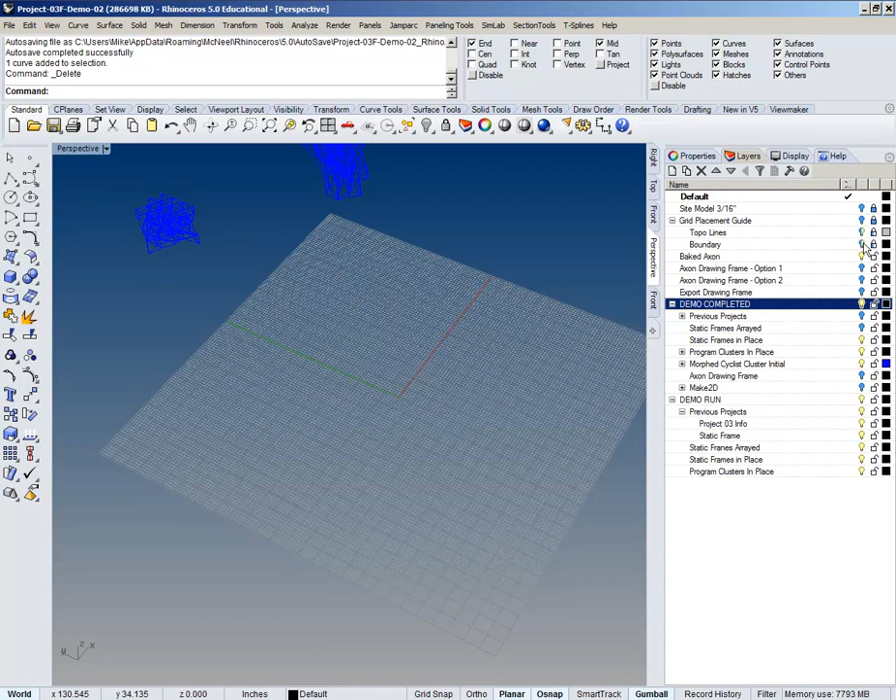Let me show you the site model, which is here. In blue are the ones placed on the site that have been modified—so in this case, you can think of it as the clusters themselves. And then in black are the static frames, and those start out as copies of the perfect version that we were talking about. You can see that the other ones are kind of stitched onto the model.

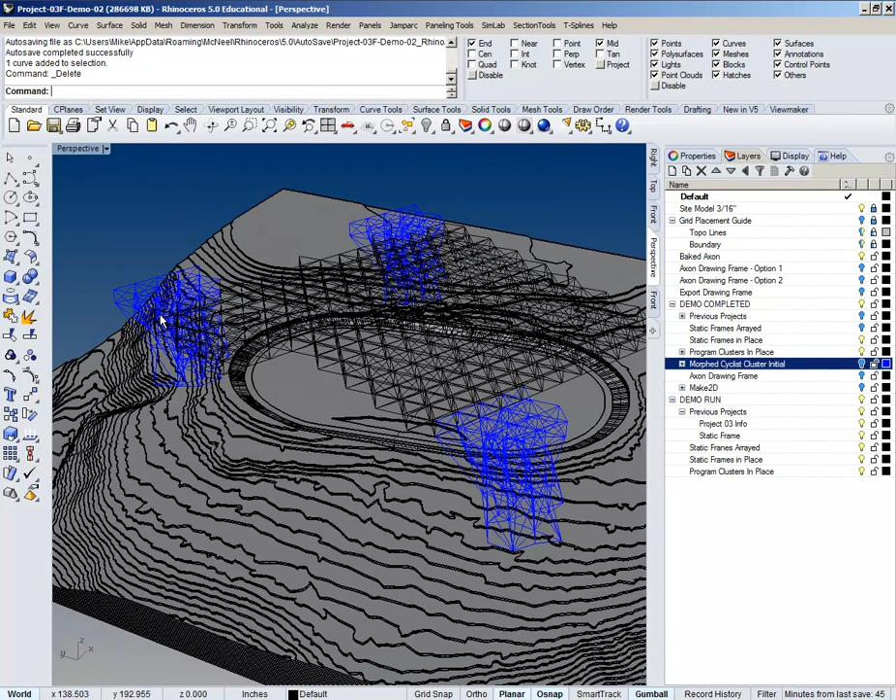So the template includes—this is a 3/16 version of the model, so it's the same exact size as your apparatus scale at 3/16. These models that are blue are analogous to what you would have gotten as output of your points—basically just putting the points in and building the model from that. And those result in drawings like that, which are the axonometric, including the site and the project on the site.

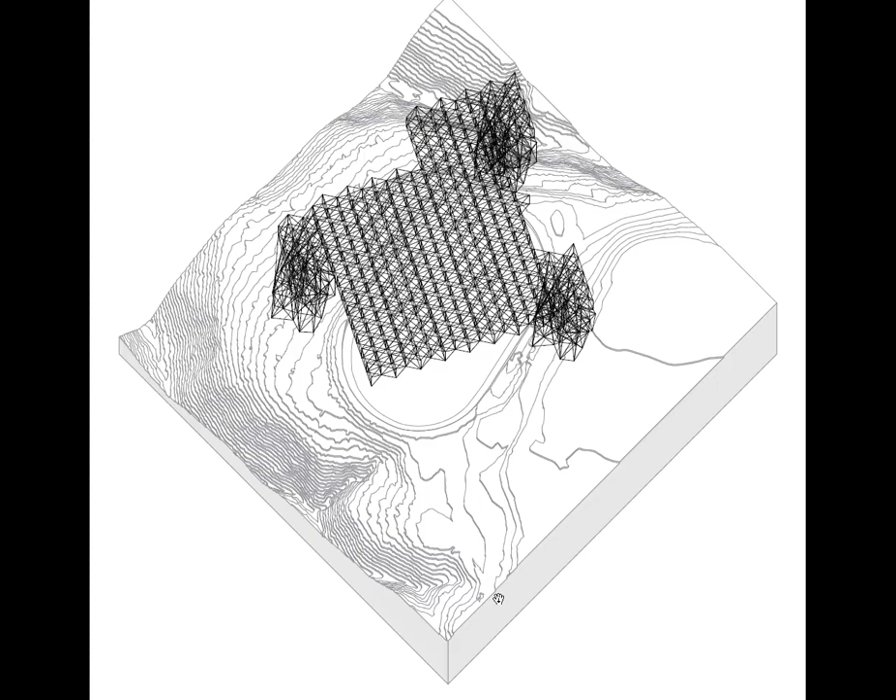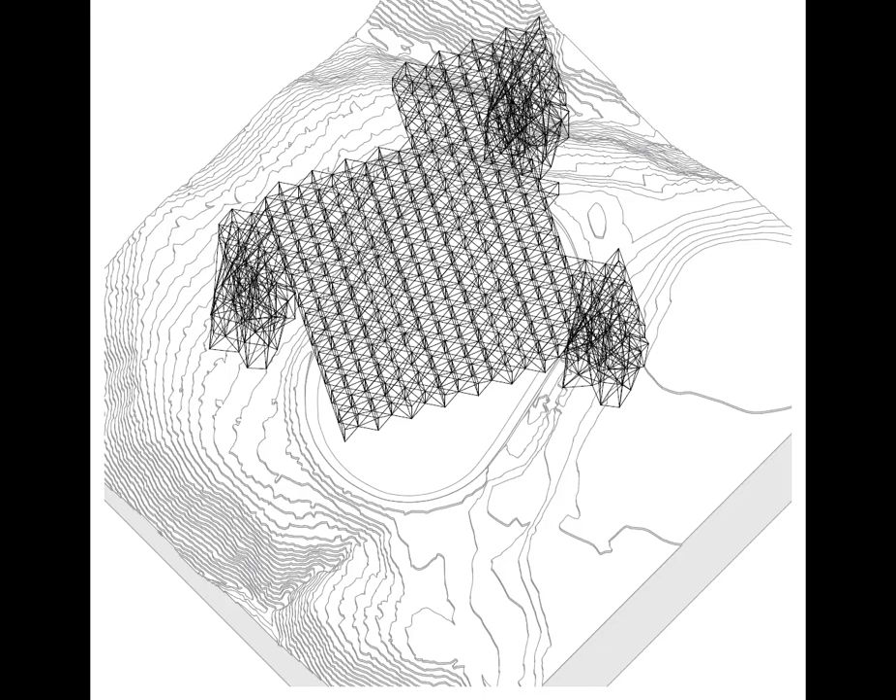You're going to have two options on that. You can have one that includes more of the site, and the other option is one that's a little bit more zoomed in. It's the same model, just cropped differently depending on how big your site is, the orientation of the site, and what graphically works better with your presentation. The template outputs to both—there are two Illustrator templates, so you just choose which one to drop the Make 2D line work into. It's the same workflow either way.

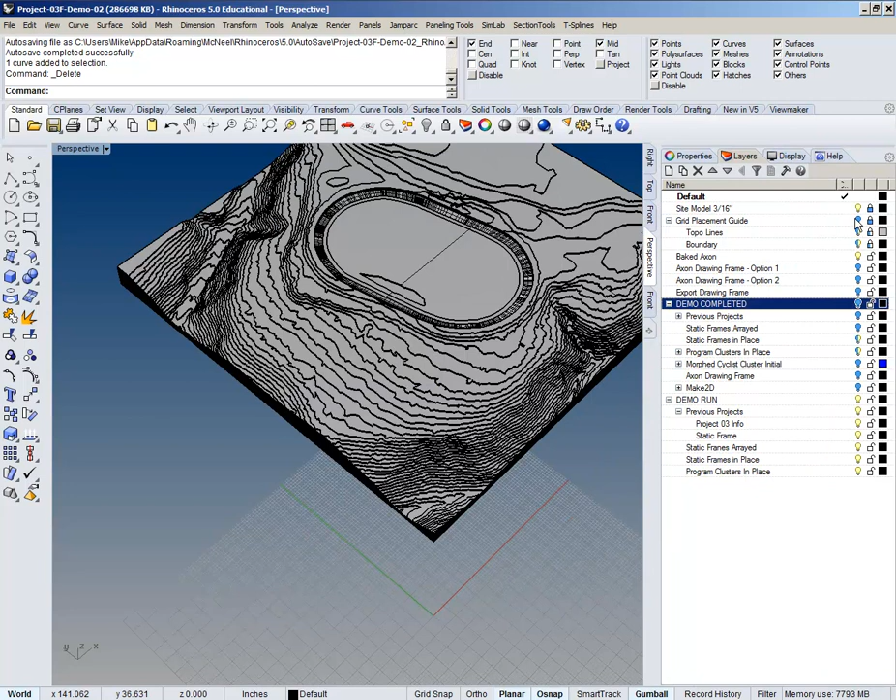So how do we get there? Well, the first step you want to do is populate the static grid as an entire series. Let me put away the thing that's been done and talk about that. We don't need to worry about the model yet, but in terms of—I've got one of these static frames modeled out, so if you've got it, I'm going to import mine, you could also just model it into this template. Let's see.

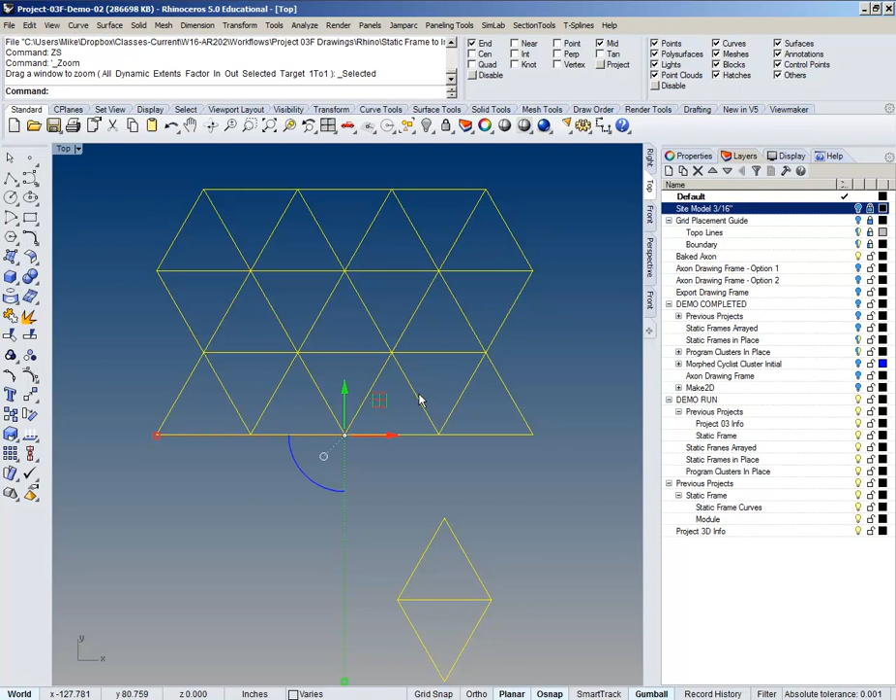So I've got mine right here. I've grabbed a module off of it just to show you a possible way to assemble one of these. This is just this module, two of them, but it's copied out of it, rotated, and glued together side by side.

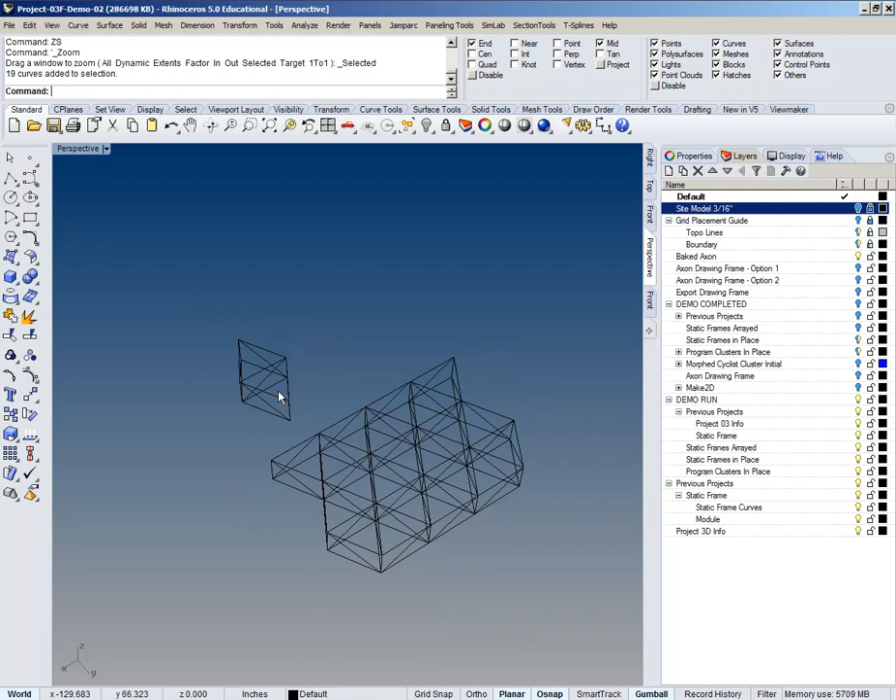It all depends on the kind of condition that you have. For this one, when I start thinking about how, what I did is I just grouped the entire thing together. So I think about how do I want to repeat this. This one, side to side, I know how it can repeat. So I can say it repeats by going side to side.

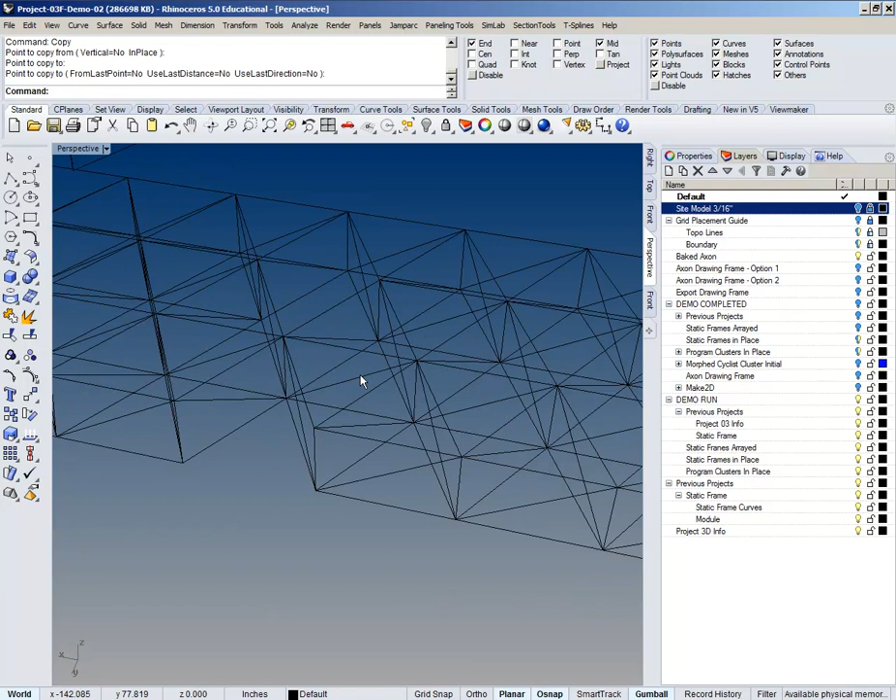It's a better point right here, like that. And I'm kind of looking at the cross members staying in the same direction. And from that, I have these kite-shaped gaps. And then when I look and connect on the other ends...

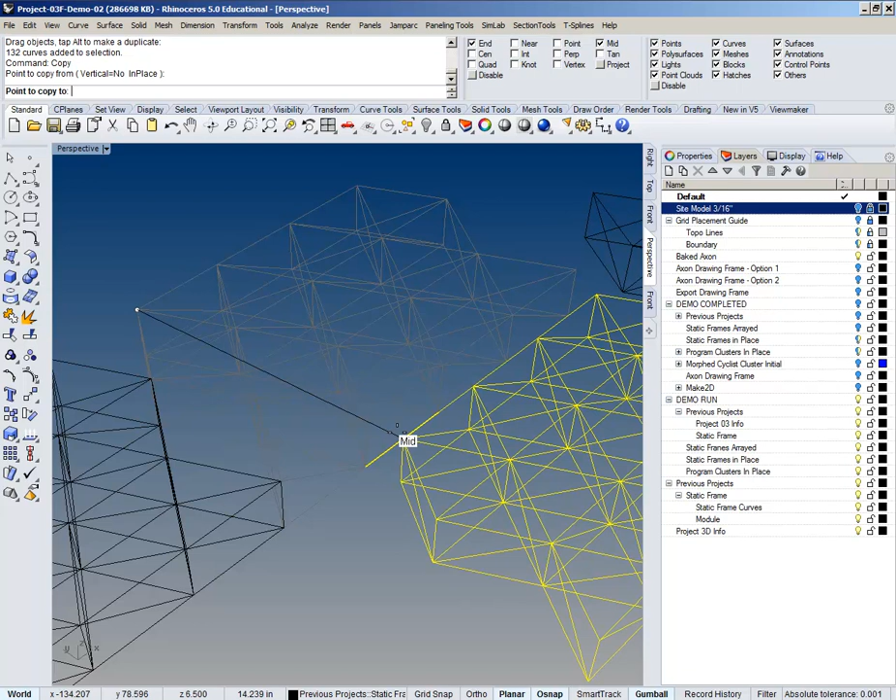When I start to copy them over like this, that might be another method I could copy it as well. That's going to leave certain gaps.

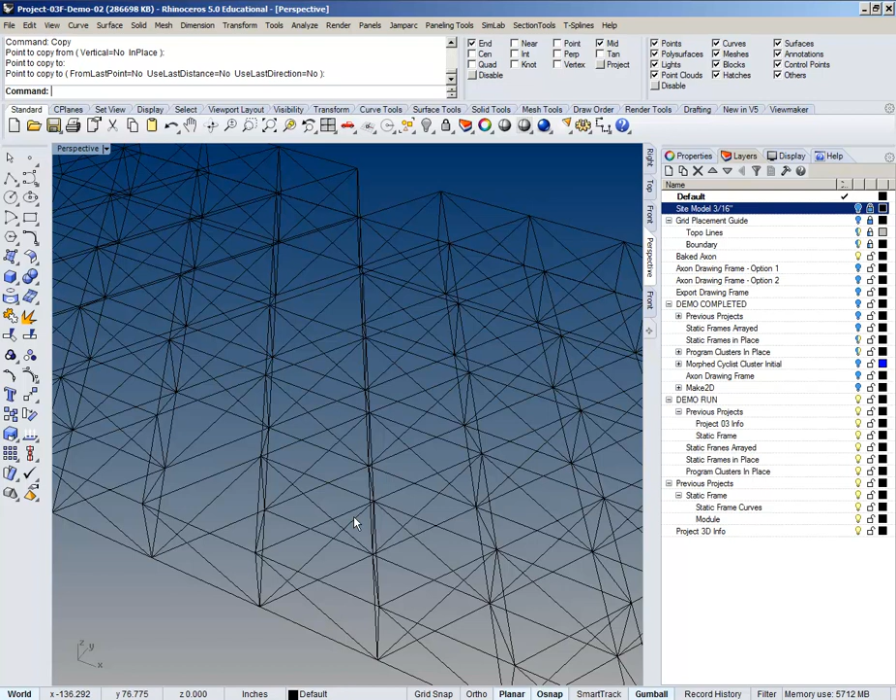For this particular space frame, doing these kinds of copies doesn't cause any problems with my cross-diagonal members. They're not crossing each other up. People with these kinds of systems want to keep them going in the same direction, and that leaves these diamond-shaped gaps that happen in there.

So that's one way to look at it. If you're worried about keeping it symmetrical in terms of what this shape is and you want to mirror that shape, you can do that too.

If you do that, you'll notice... let me go back one step to here. So if I brought it around the other way and lined it up so they're sandwiching each other, like this, you can see that that's going to cross up their cross-diagonal members and create these X's here.

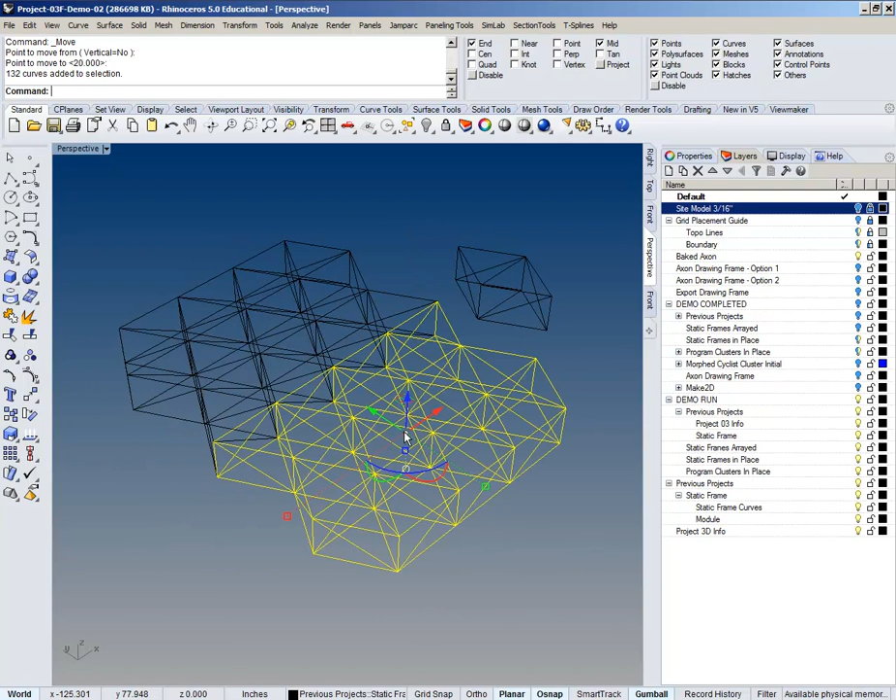So if you're worried about something like that, you can take this object and mirror it as well. Just basically mirroring it on a vertical axis will create a mirror image of it, and the cross diagonals will all be going another way this time.

A quick way to do it is in elevation, just go into a front view and do the mirror on a vertical axis, and then you don't want to use the copy option. So say copy no.

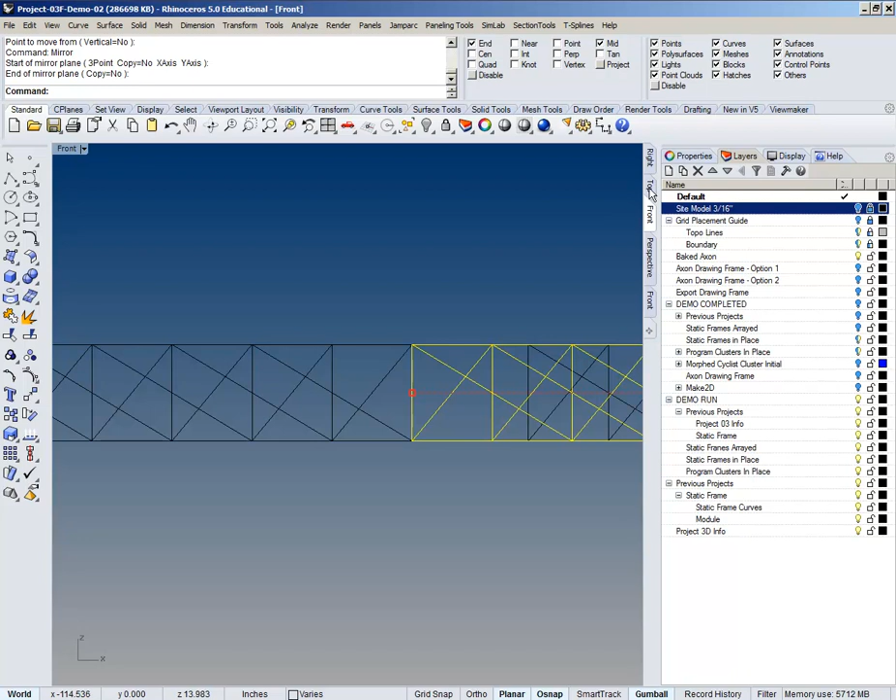Now the diagonals are going the same way, and then this can repeat in that direction as long as I want, and I'm guaranteed I'm always going to have the diagonals in the same kind of way. And I could use this piece to plug it in there. So that's my logic that I want to do.

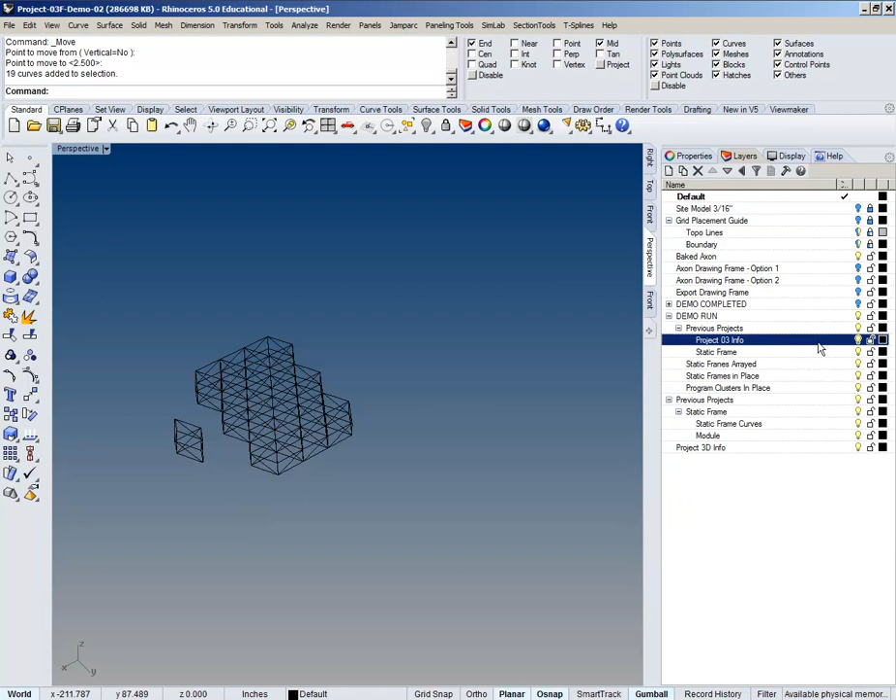Then the question is, well, how do I know what copies I need and all that other good stuff? So that's when you would input previous project info. That's when I would bring in stuff from project 3.

I've set it aside, but you guys already have this info, and that's basically what your flows were when it comes to the grid information itself and the flows and all that kind of good stuff.

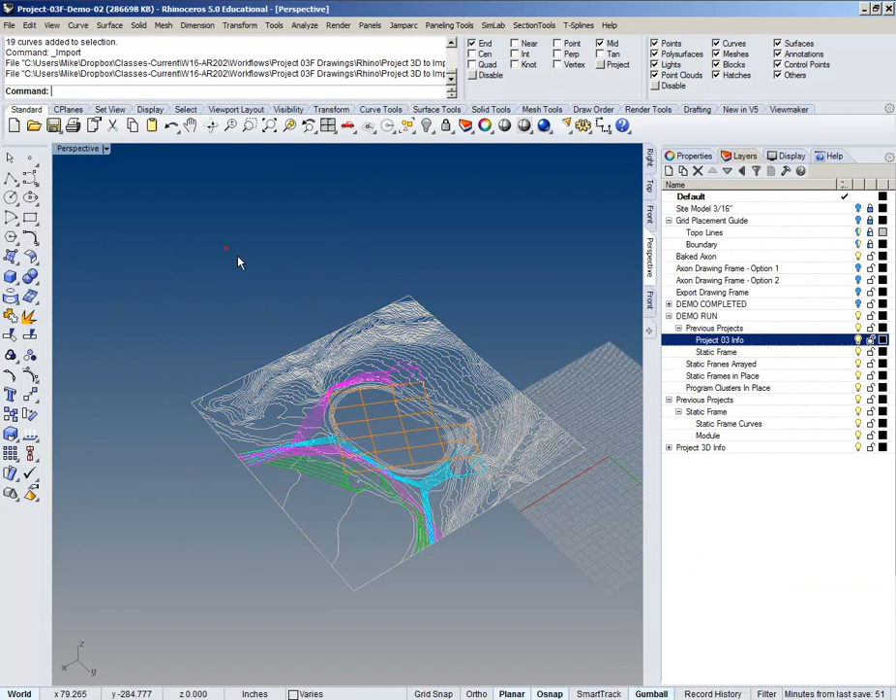So this has my frames here and all that. I put this kind of stuff—it's called... I have it under Project 3 info. So I'm just going to place it in the previous projects here, and that's a redundant name.

This has the site plan. It has the flows. It has the selected tiles. It used to be black—I changed the static tiles to have an orange color just to jump out from the topo a little bit. But everything else is the same.

This also has the footprints, right? The three footprints—for this case, I just dropped them in there. Everything's flat, it's a 2D drawing.

So what I want to do is, if you take the long view of it, I've got this layer called Grid Placement Guide in here, and that Grid Placement Guide is directly underneath the 3D site model. So you can already place everything, align it to your grid, and then all you have to do is move it vertically to get up on this site.

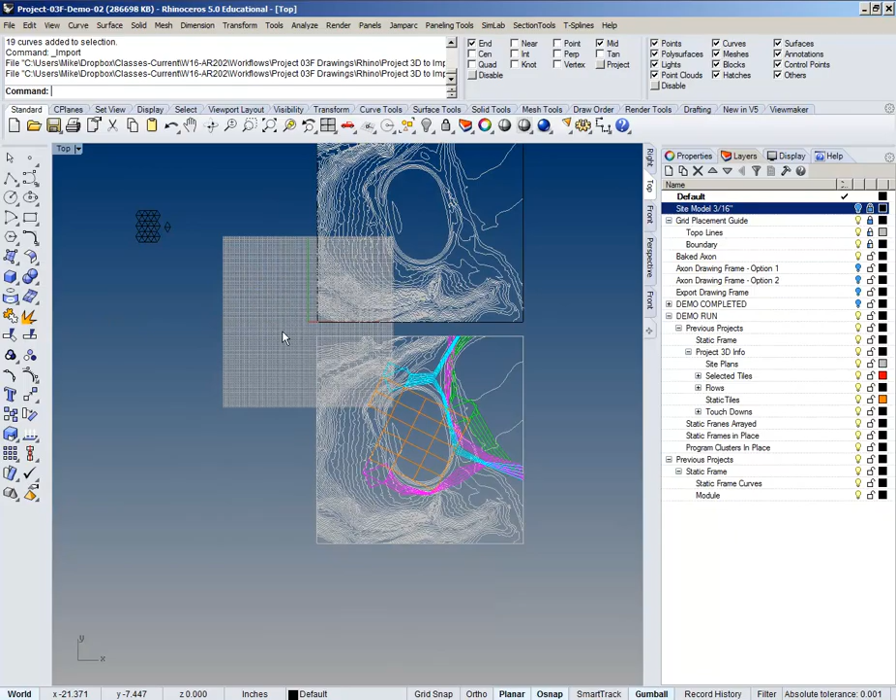So you don't have to do a complex movement or anything like that. What happens is I had this grid placement guide locked, and I take this project info and just move it over there to match up with it.

I'll pick a better spot to move it from too. Usually when I'm doing this kind of stuff, as a safety measure, I put on the project setting just to keep everything 2D, so I don't snap to something 3-dimensional by mistake. Whenever there's a lot of moving parts, I like to do that.

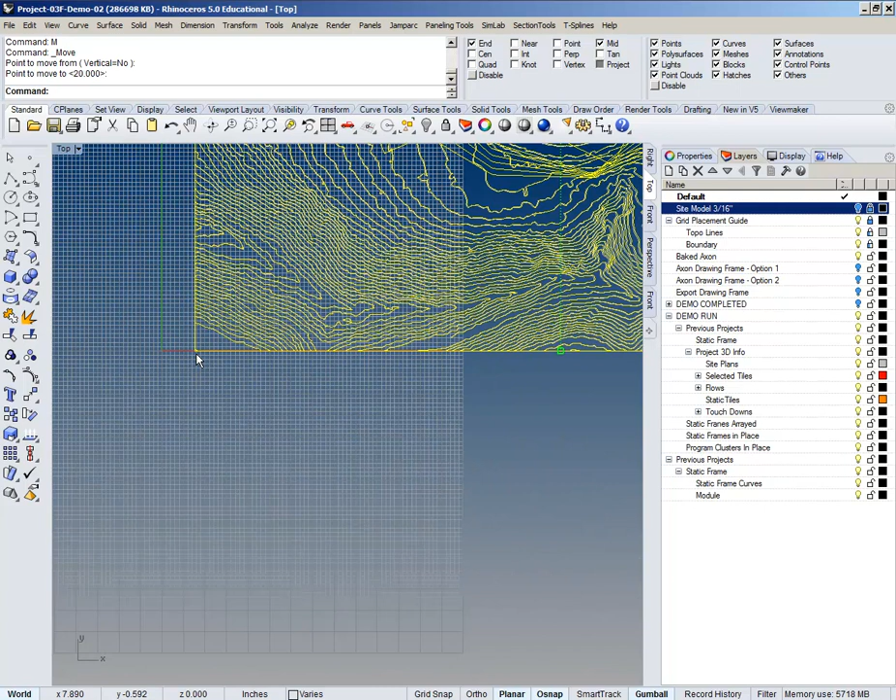Now that's in the right spot, I can take off that grid placement guide. I've got the data from before for project 2. I'm going to lock some of this stuff like the site plans and turn off the flows for a second, and take off the site plan so I can just see this situation here. I can take down the touchdown to keep it simpler.

So I know I've got that, right? I've got, in this case, 1, 2, 3, 4, 5, 6, 7 by 4 grid. So that's the extent of my entire thing. I'm going to group this one here. And since this one is now working as a new module, I don't want to just repeat this one, I want to repeat them both, so that the tiling works out nice. It's going to be different from everybody's, but I just wanted you to see the logic.

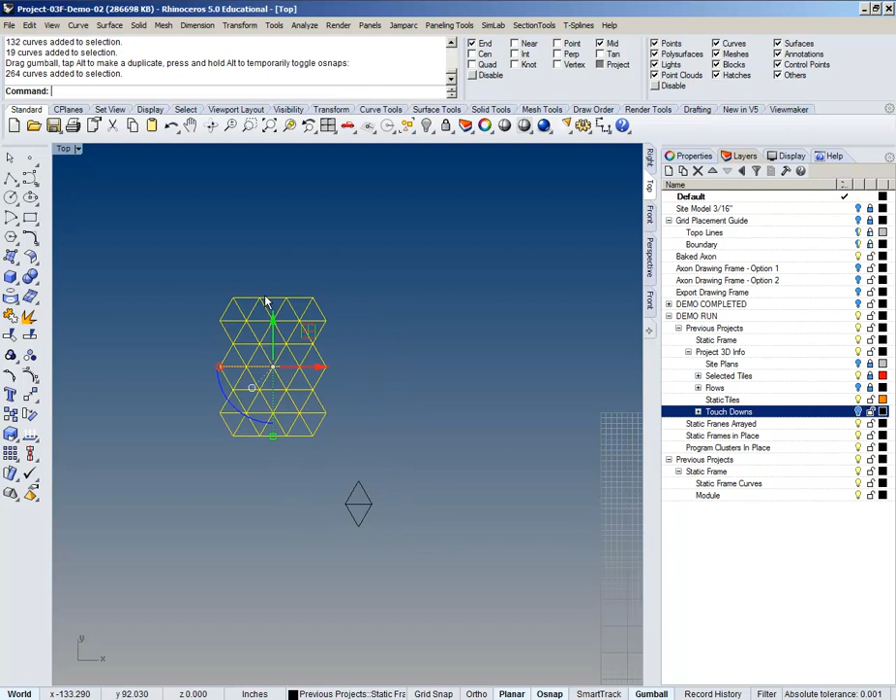I can move this key out of the way. I'm going to group these together, so I can just do Control G. I can have groups inside of groups inside of groups.

I'm going to make an array of these, and I think I said I need 4 in that direction, and I need 4 in that direction because these are too high now. So that'll give me 8, more than what I need. So I'm going to do 4... no, I'm not worried about the Z direction.

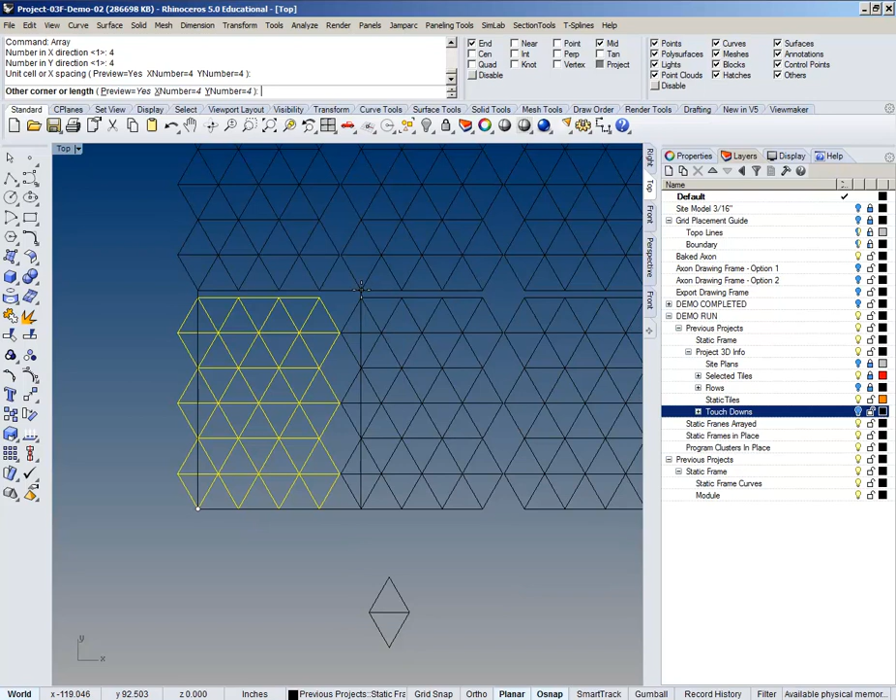In terms of my cell spacing, this will give me a preview, but if I do the cell spacing with X and Y, I can start to go like this. Now what I want is out here, but I can't snap to anything because nothing's out there. So if I turn on my smart track down here, I can pull off of this endpoint and this endpoint and find the intersection that occurs right there. That's the cell spacing I want for my grid system. So I would say okay on that.

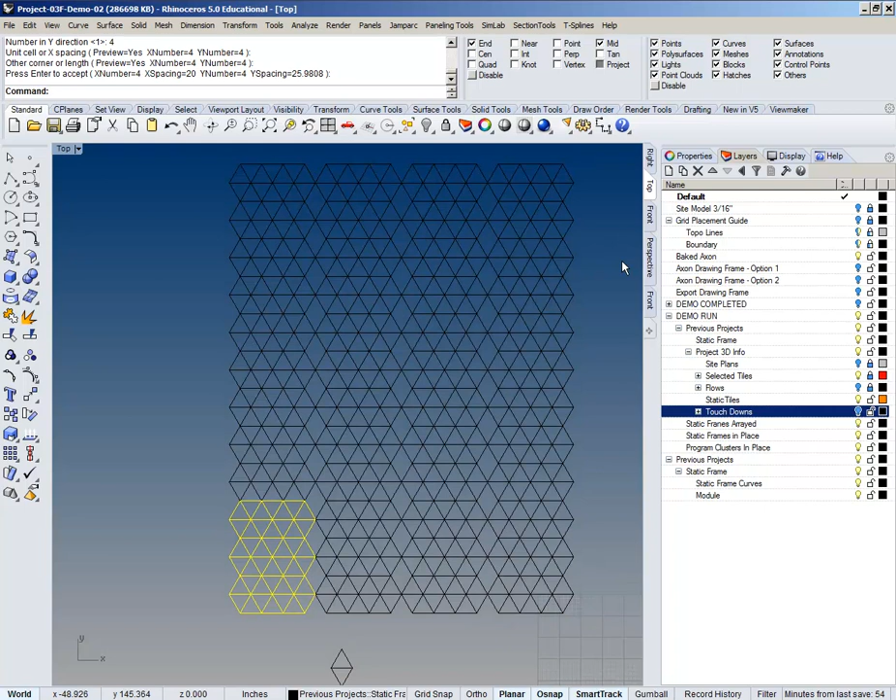As you can see, it's kind of hard with the curves, but I've got this condition here where I've got holes in it. Maybe it's a little easier to see in perspective, that I've got these kind of gaps, these holes falling in there. I can fill those gaps in pretty easily with the array command.

You always want to put... so I've got this as a grouped object, I think it's grouped, yeah it's grouped. I'm using project here because I want to keep everything flat and planar. I'm never worried if I have the project on, if I move something in the Z-axis or anything like that, everything is going down to the C-plane and not changing heights.

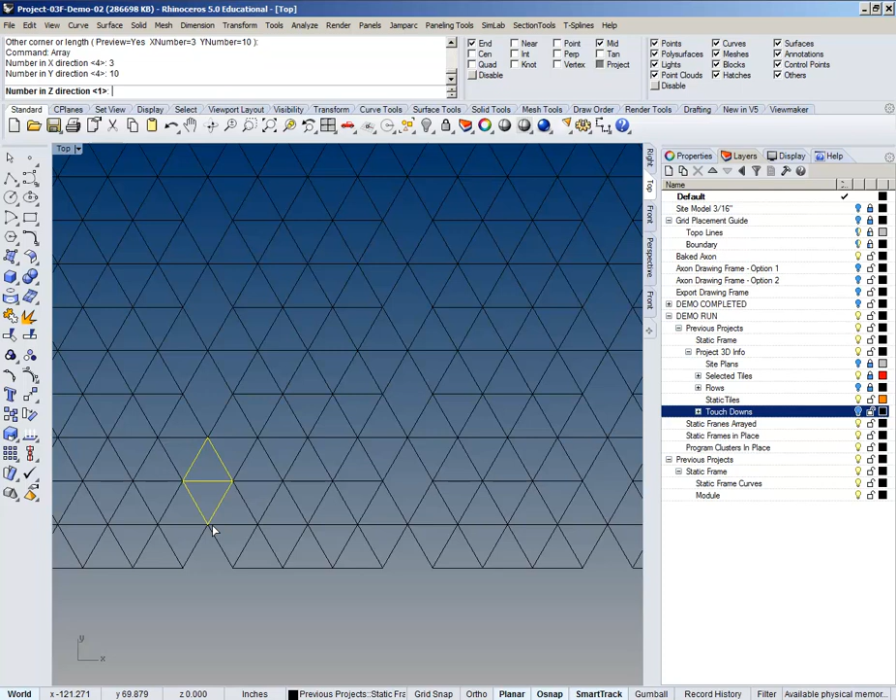I've got this end condition here. I'm going to leave it, and I can always go in here and modify these end conditions if I want to using this module. So this one's like 1, 2, 3, 4, 5, 6, 7, 8, 9, 10. I'm going to do an array of 3 by 10 by 1, and my spacing on this one, actually I want to start by a different point, start here and go up like that. That's gonna... nope, I need more Y's. There we go, so that's done in terms of being filled out.

Now I can either count these and start taking them out. Mine's fairly simple and I can decide what I want to do, or I can bring this whole thing over and pop them out too. It really doesn't matter.

For this to get a good corner, I'm just going to do a bounding box on one that actually exists. So maybe it's a good idea to take some of these out right now, just because it'll give me something better to snap to.

So if I explode this group... or I can just do the ungroup, I don't want to explode it. Exploding will explode all the things in it, but it won't ungroup it, everything will stay grouped. So if I ungroup these, I can get rid of these guys right here.

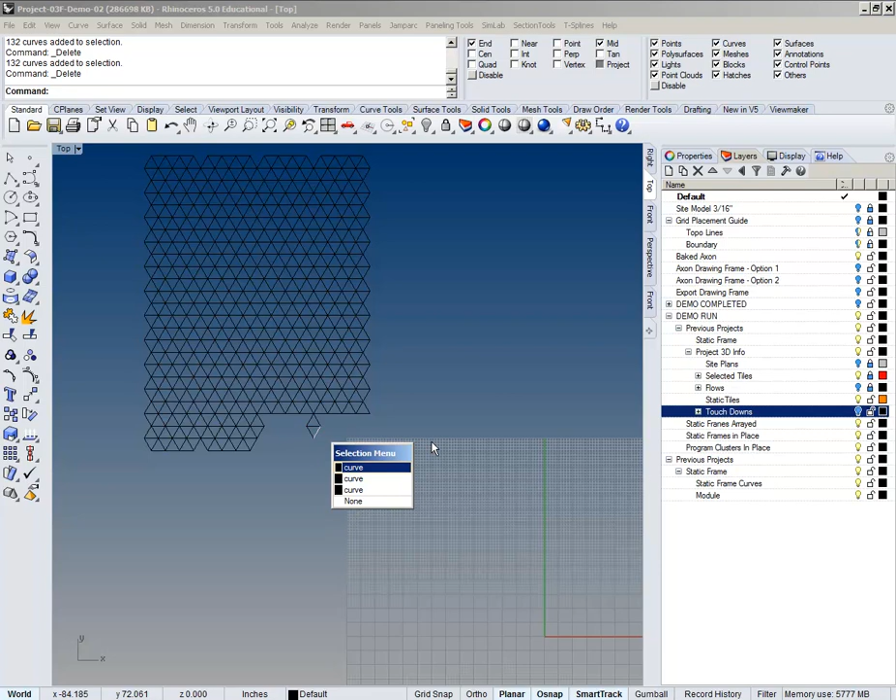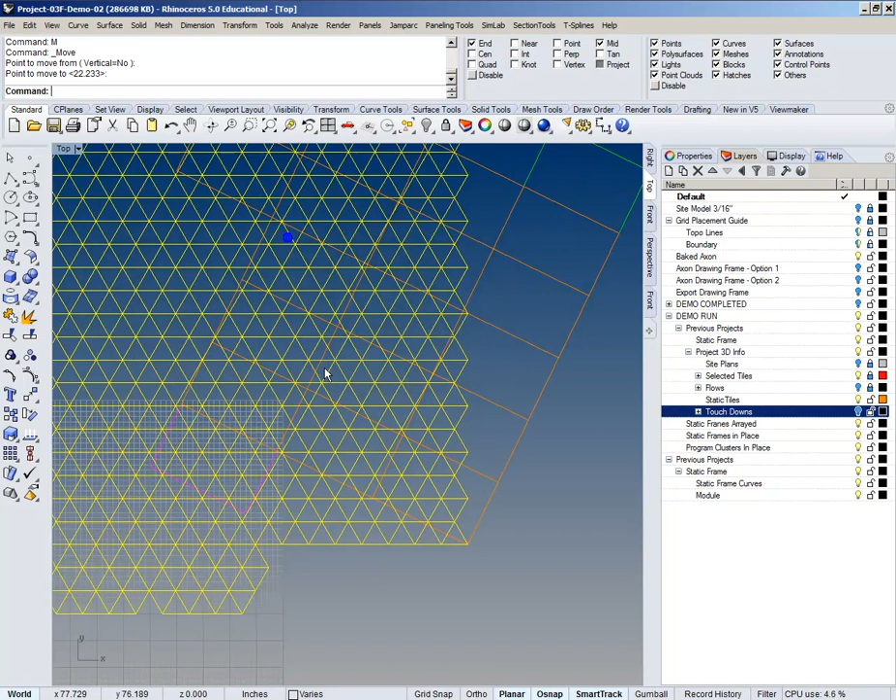And that's a good corner to start lining things up to. So I can take this and move it over here. This just happens to be where my bounding box hits one of these guys, I kind of know that already. And I'm going to rotate them from that corner as well. So again, I'm moving over on this one, so I'm going to come up here.

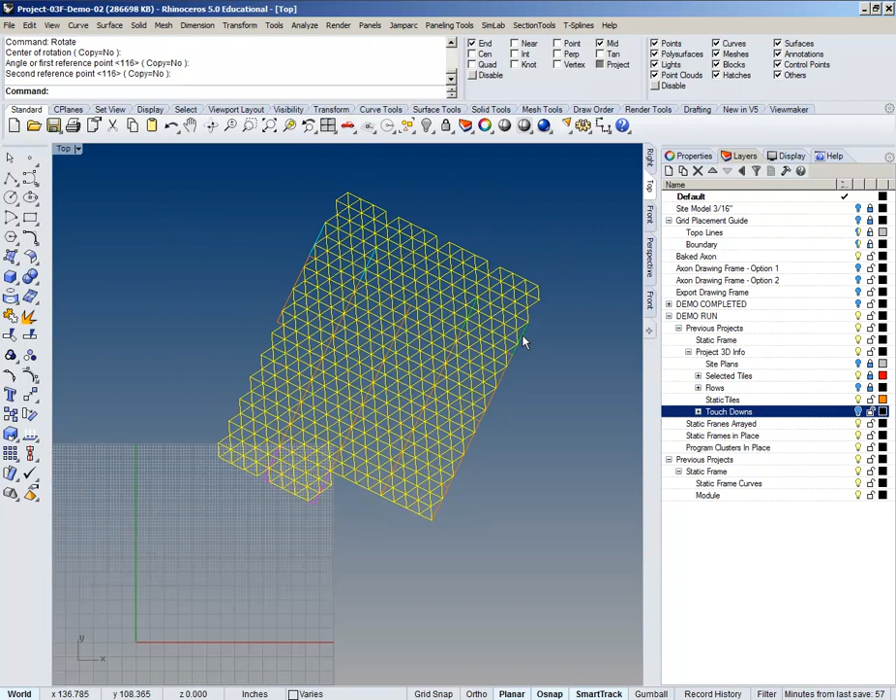And SmartTrack. Yeah. So in this case, I've got some extra ones that I can lose.

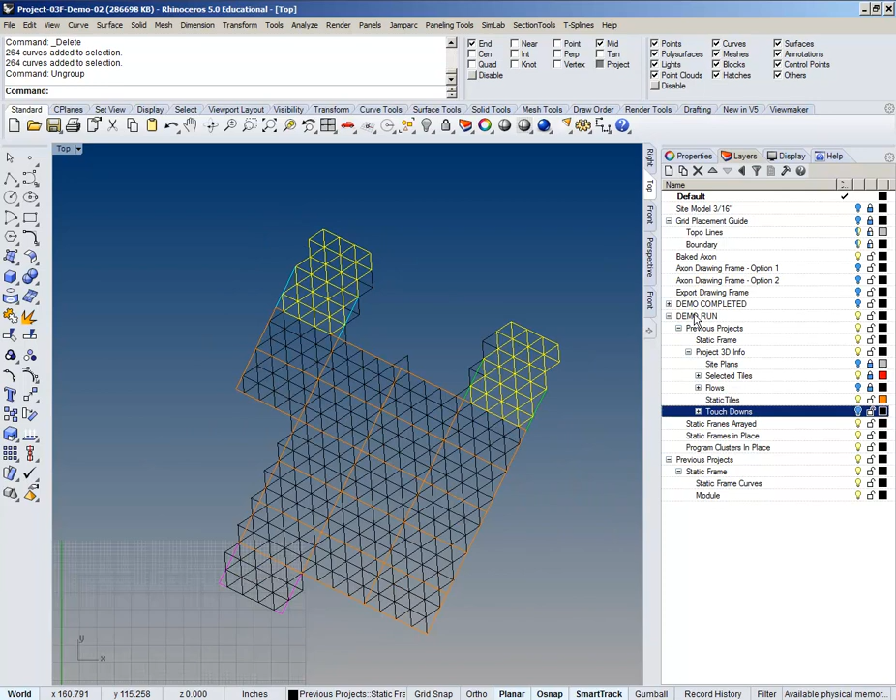And you decide if you want that one or not. I kind of like that there. And again, I can ungroup these two to break it down into smaller modules.

Same thing goes for these, since I'm going to replace these with the deformation versions. Okay, so I'll get rid of those two, and you can decide what you want to do. Sometimes it's nicer to keep it rather than get rid of it, because it's easier to delete it than it is to go and find it and add it back.

But let's say this is your setup and you're kind of happy with it, and you can see that in perspective, they're kind of all planar and they're attached. In the way that I did them, my diagonals, I'm not getting anything kind of funky going on it. So that's looking good.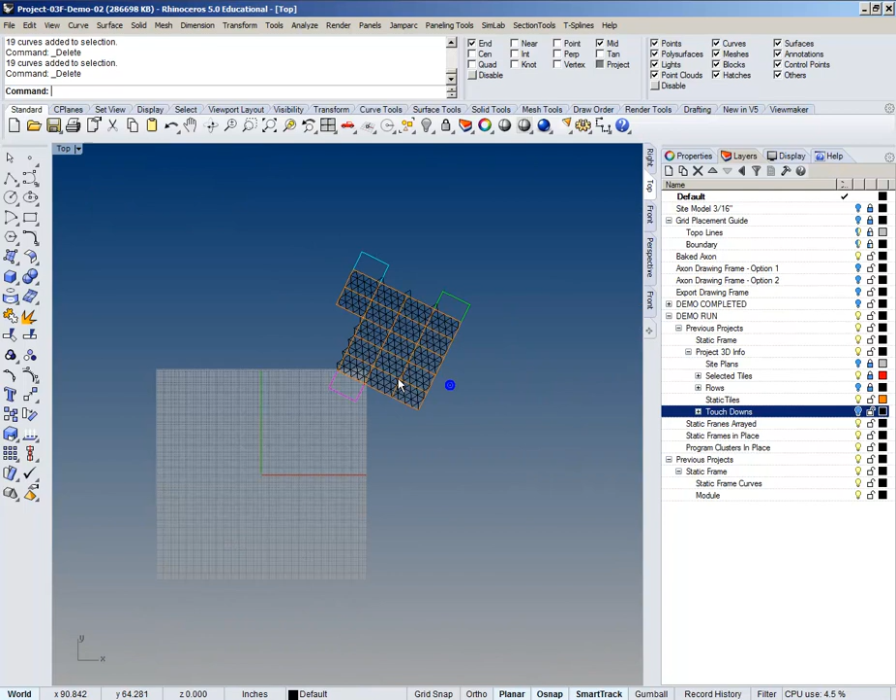You can start to see why it's important to use the perfect one, that way everything lines up kind of clean. So we've arrayed them. So the next thing to do is to add the cyclist cluster to the grid along with the other clusters.

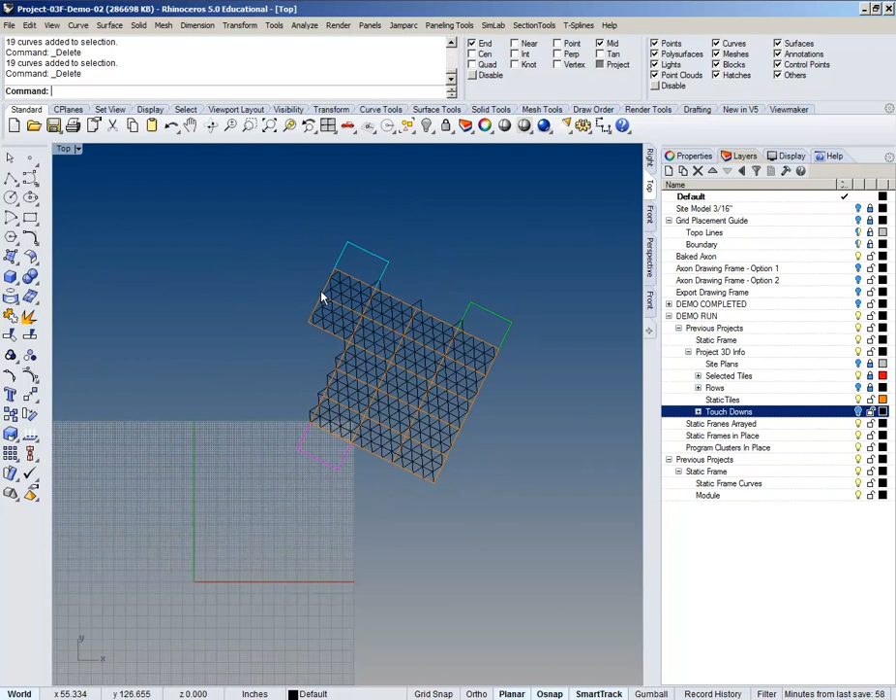So I've got it here. What I'll do is I'll just bring it in, so I'll take a look at it. I think I've got it in a separate file here, and this is just the model itself hanging out. I've got a couple of other ones that are in there too.

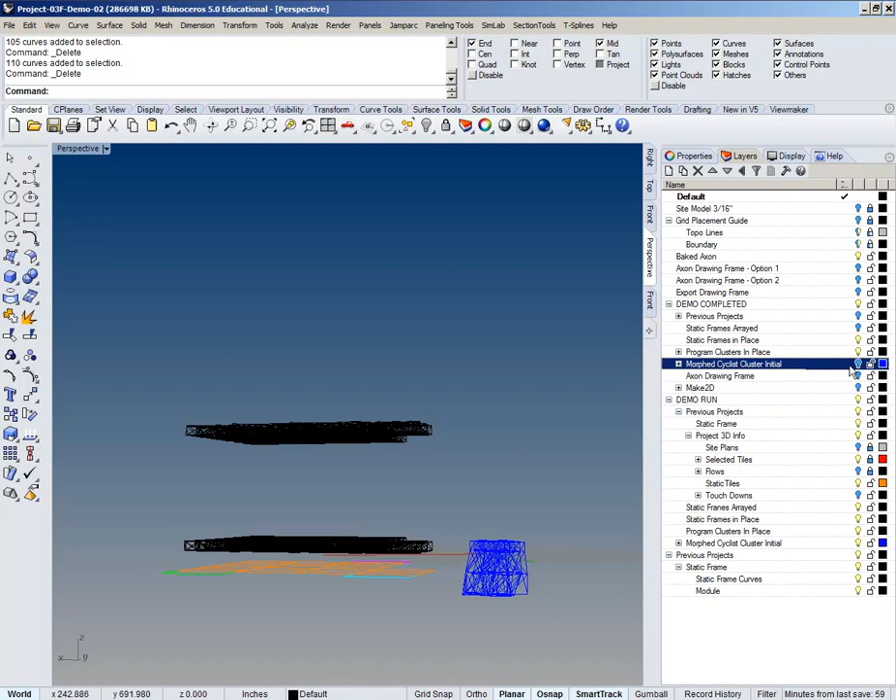Those are the ones that are already in place up there. So I think I grabbed too many of them. Let me take that layer off. There we go. Cool.

So if you've got it like this, it might not be that height, it could be another height. What this is for me is I've got them grouped as 3 separate ones, but I can treat it all as one group. So I'm going to Control G that to group it.

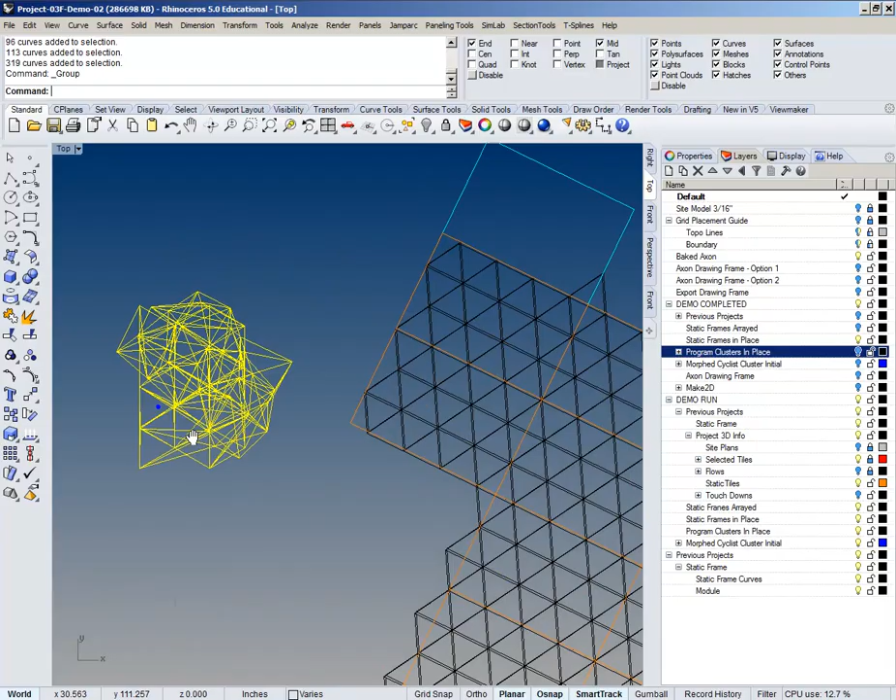And I'm going to place it in my actual setup here. So plan can kind of trick you on this one. You just want to find a good point to connect to. So I'm just going to start with one of these corners and look at what's going on with my grids.

I know that this is kind of a good start. I'm not so worried about getting it perfect the first time. I'm more worried about just connecting nodes with nodes, and then I can start to nudge them over. So if I get in the neighborhood here, and I'm kind of familiar with the way that mine tiles, I'm going to give this one a shot.

By connecting this corner to that corner, and I think that's right. So I'm going to rotate it. I can rotate this in 3D because the rotate is always about what the world C-plane is. Only if I can spell it though.

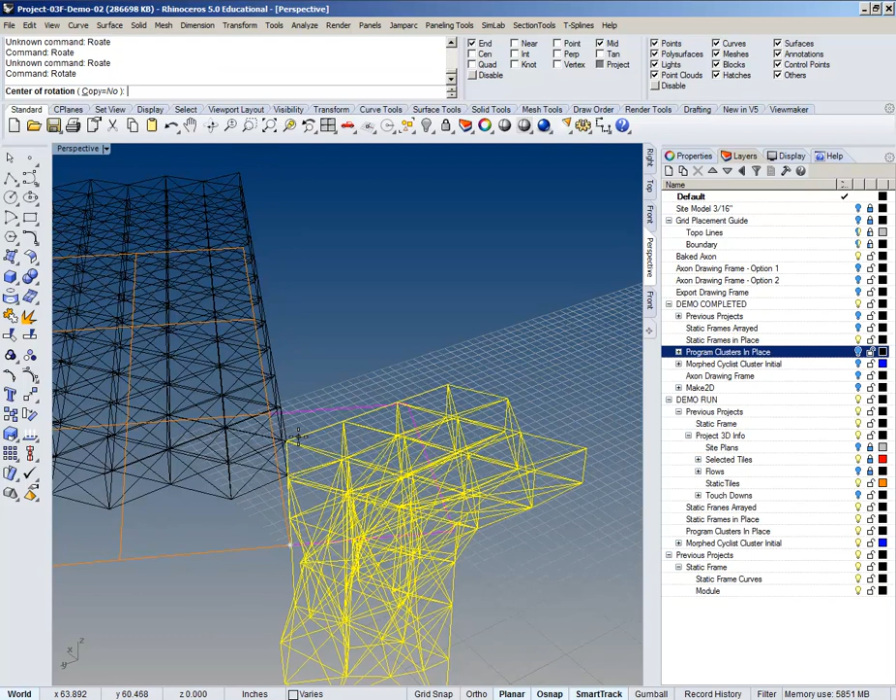So my center is going to be where they're already touching, and see how it's projecting down there. It just makes it easier. Go there, and I'm going to bring it over to there. And this one gets a little harder to read in plan because things are already kind of distorting away from you.

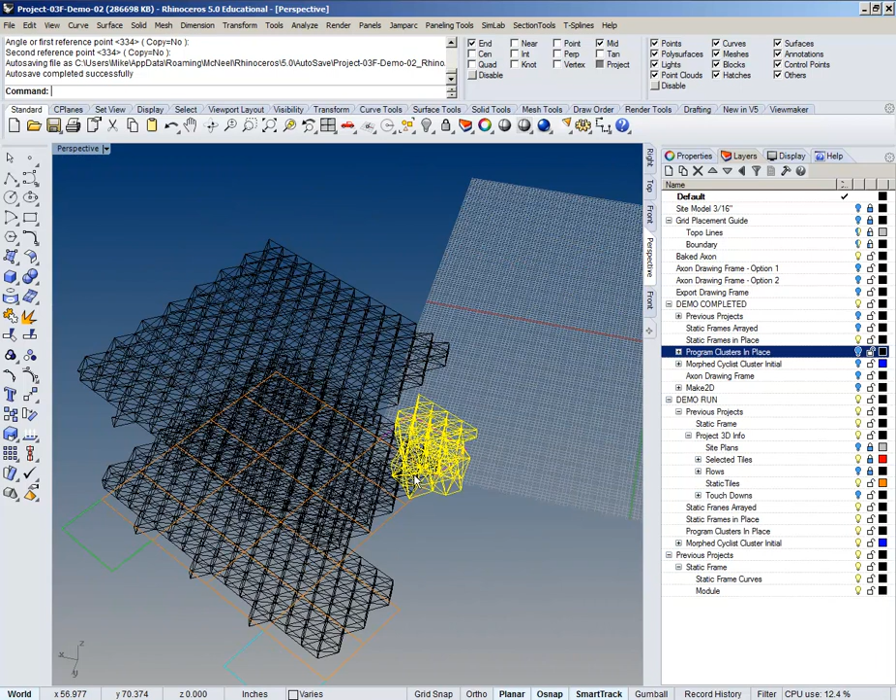So from this point on, perspective is kind of a better friend, but you can see the edge condition there, right? It's like consistent. So that's actually, well, I put it on the wrong one, but that's okay because it's the starting point for all of them.

But that alignment is pretty good start for my other ones. So you can pretend that I did the cyclist one first. I'm going to copy it, and I'm going to copy this front corner and attach one back here.

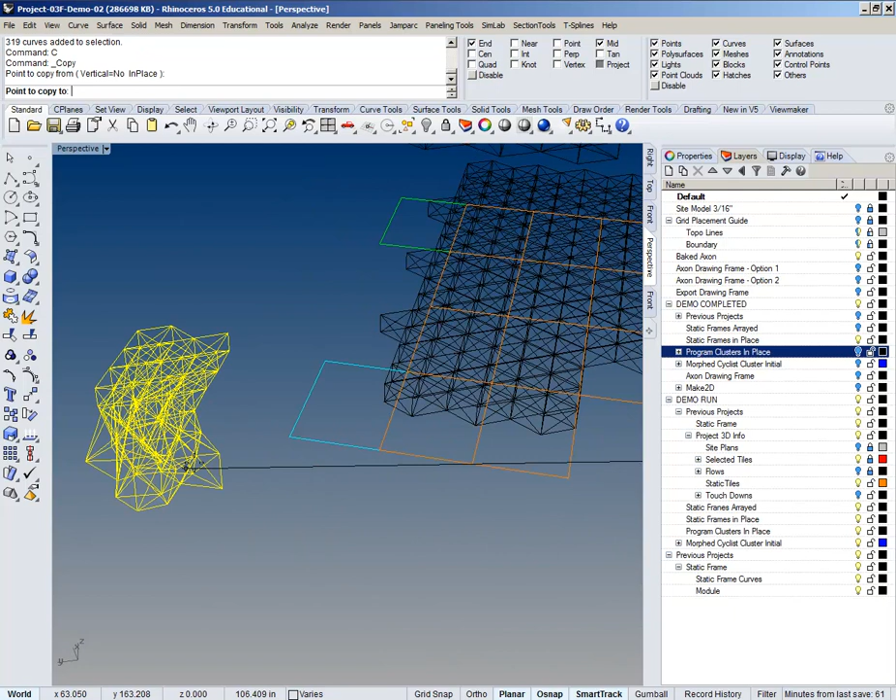And one back here as well. And that other layer up there is when things got moved up, that's just one step ahead. I'm done, so I'm going to hit enter and get out of there.

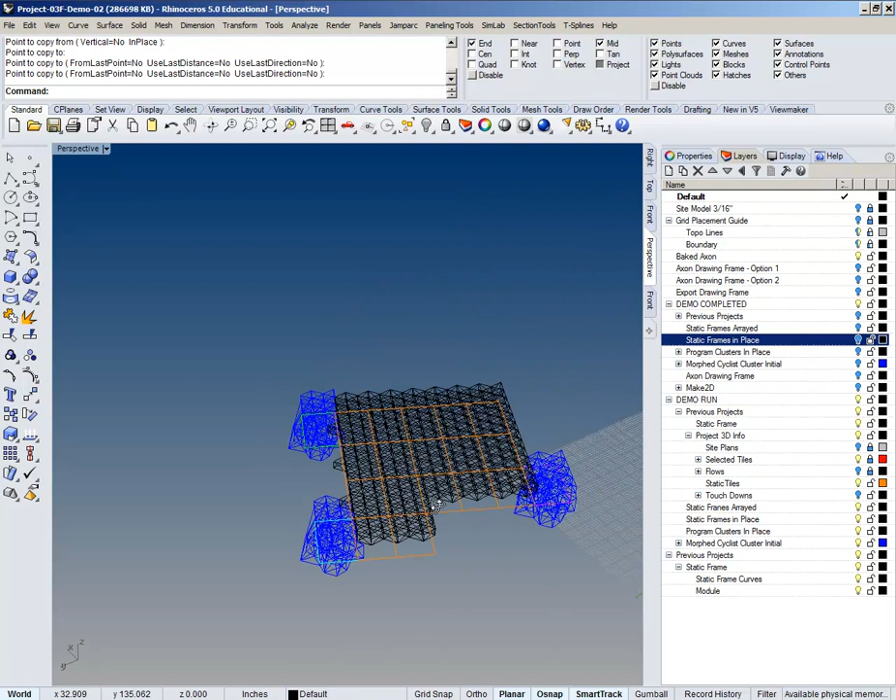So now that these are in place, this is about the level of resolution that I'm worried about. The reason why these orange ones are kind of shining through is I just changed the draw order.

That's something that if you guys have trouble with visibility and dropping things in, so if you're in your top view, if you don't do that, you won't see the blocks anymore. You'll just see the black frames, and you won't be able to see where your grid's supposed to be.

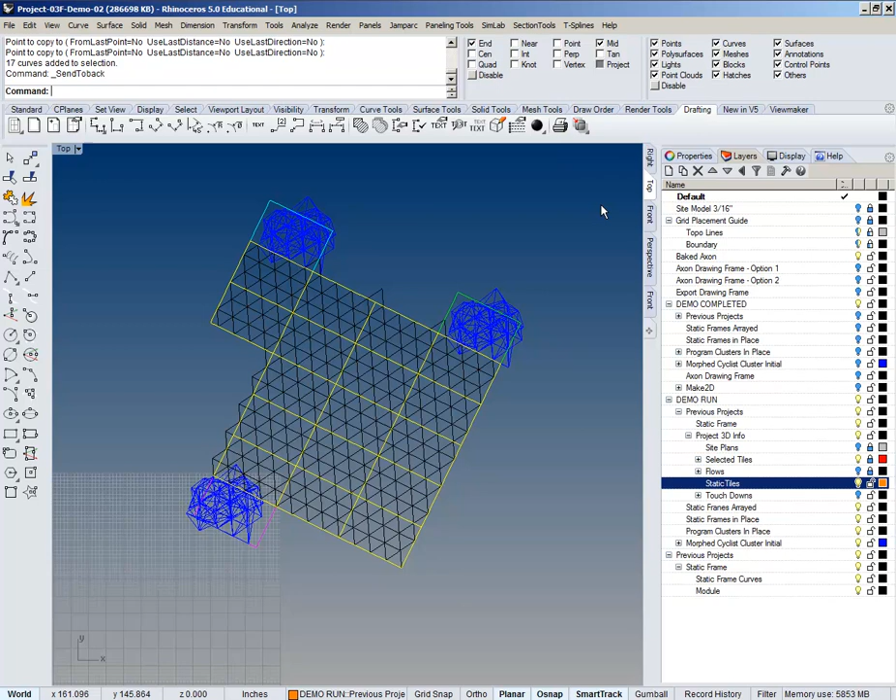So if you ever want to change that, in this case these guys are these static tiles here. You can select the objects, and if you go into draw order, which is under this drafting tab too, you can send objects to the back, you can send them to the front as well. So if I send them to the back, they're going to be behind the black, and I start to lose some of them.

And if I select them and then bring them to the front, they're going to shine through anything, no matter if it's surface, solid, it doesn't matter. It's going to shine through. So that's kind of helpful. And it doesn't matter what layer they're on either, it's just going to shine through everything. So that gets us to the assembly that we want.

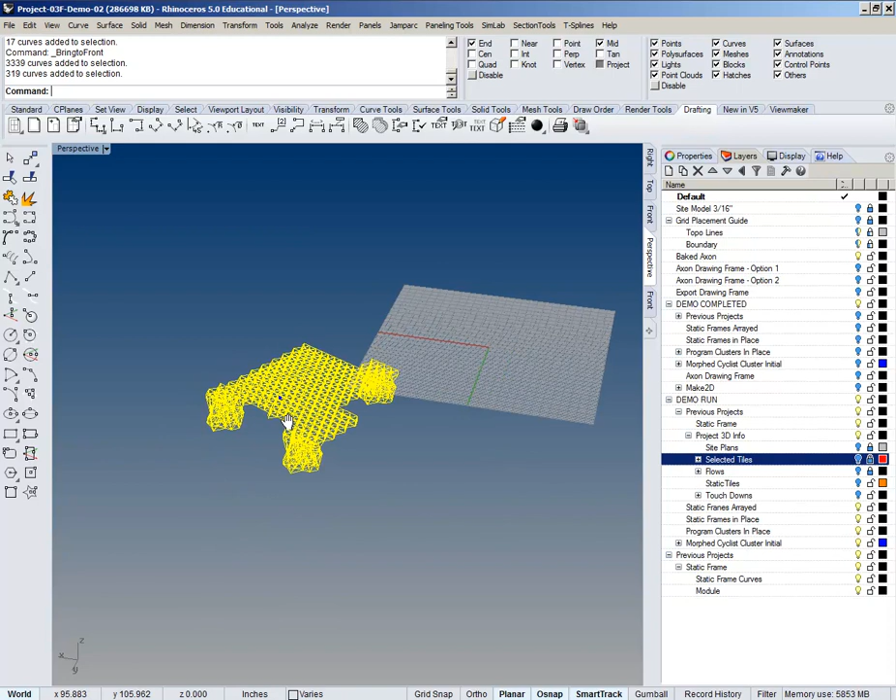And the next thing to do is to get it up onto the grid itself. So let me take these off in terms of the selected tiles and bring it up. It's all going to be a little bit different, but I'm going to use my guides to be the cyclist one, which for me is back here. I'll put those back on there for a second. Back here is my cyclist, and I'm going to use that as a guide as to what goes where.

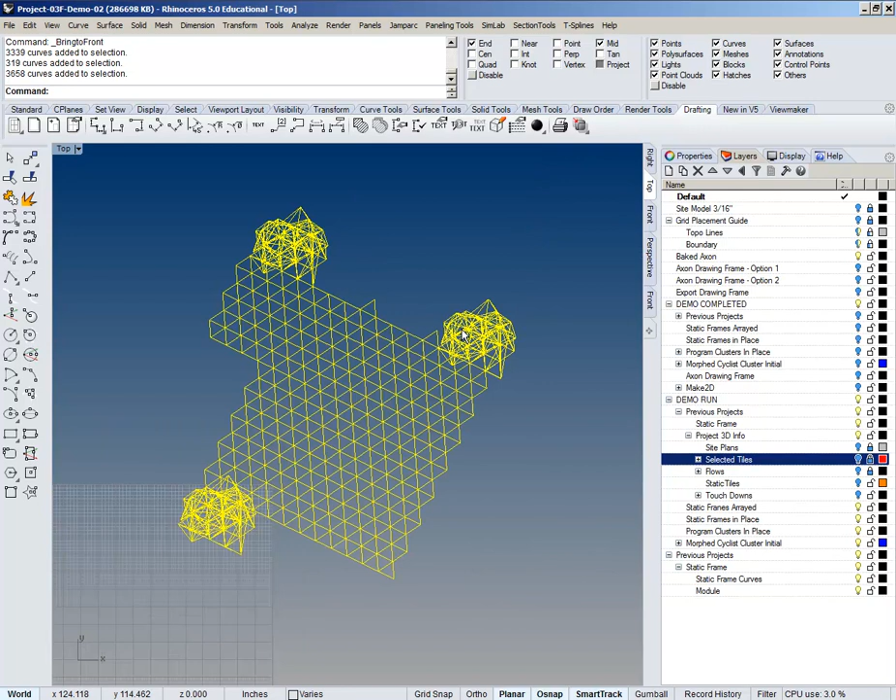So I'm already in the XY coordinates. I'm already in the right spot because that guide already lined me up there. So the only thing I'm worried about now is the Z value. And the Z value, I turn on my site model, which is this layer here, and it's kind of sitting below it. Yeah, I'm just going to bring it up so it's easier to kind of bring the gumball on there. Take my project off.

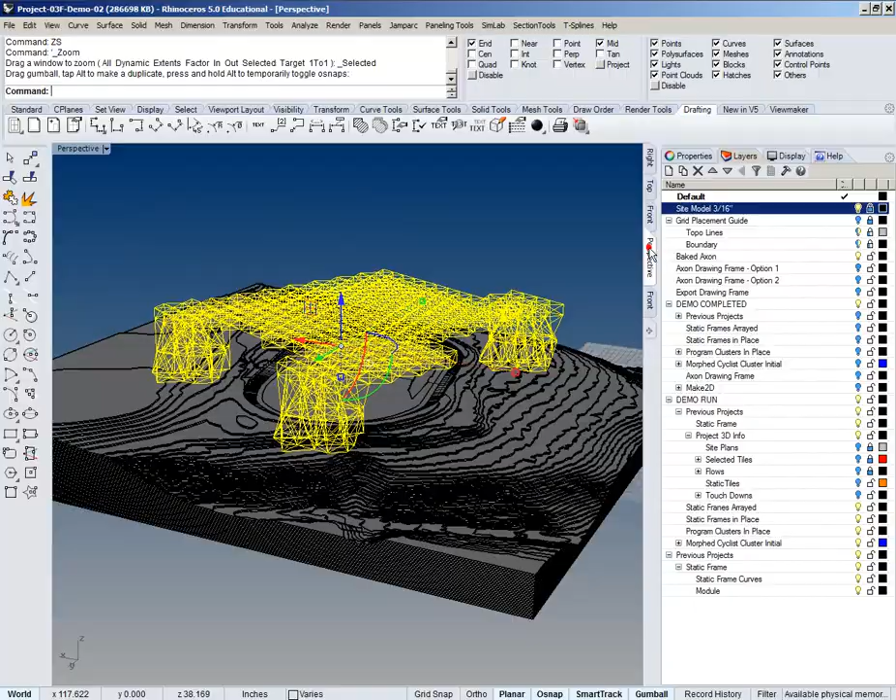I can also, in this kind of front view, start looking in the neighborhood of where I want to be and getting it on there. And I can start to, if I'm in a side view, use the project to do straight vertical kind of moves and stuff like that. And I can also use it in here too to do straight vertical kind of moves.

So I think I said that this one is my cyclist one. Now mine's flattened out. Yours would already have some tilt to it, so yours would actually already give you a better idea of where it's supposed to be than mine. I'm just going to do a move. I'm going to lock it vertically and take the smart track off at this point because it's a little bit hairy. But one of the other reasons why we did a model like this is not only for the kind of graphical clarity, but for the leveling ability.

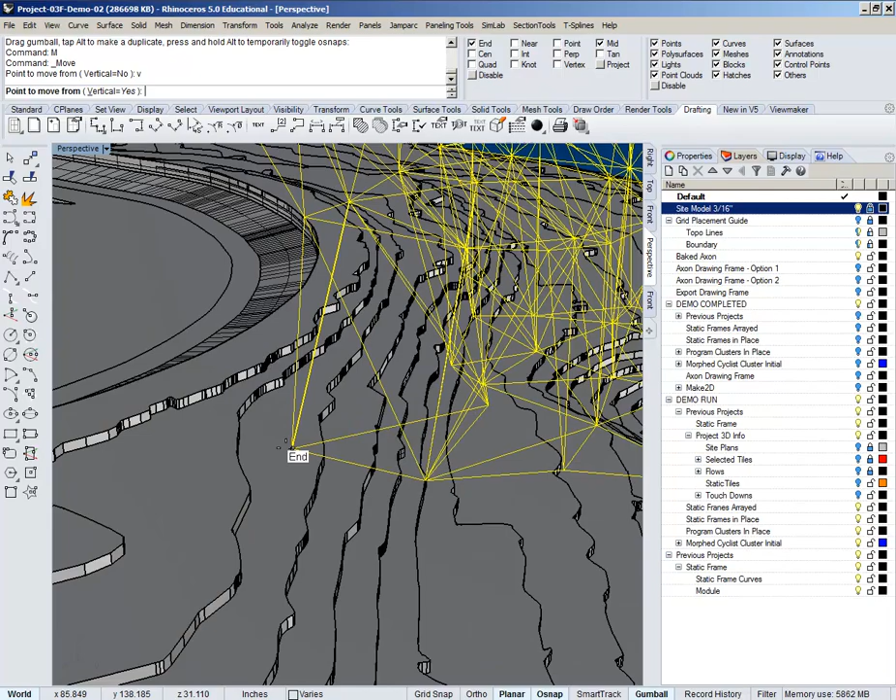To take a node and find the right level for it instead of trying to hunt it down on some kind of triangulated face. It's really easy to snap to these things this way. So basically all you have to do is take a point and find one of the ridges it's by, and you're going to have all these end snaps because they're all little surface edges. And you can snap right to it, and it's going to put it on the spot that it needs to be. And you can always go and kind of check yourself in the other view to see, once you get familiarizing with levels or something like that.

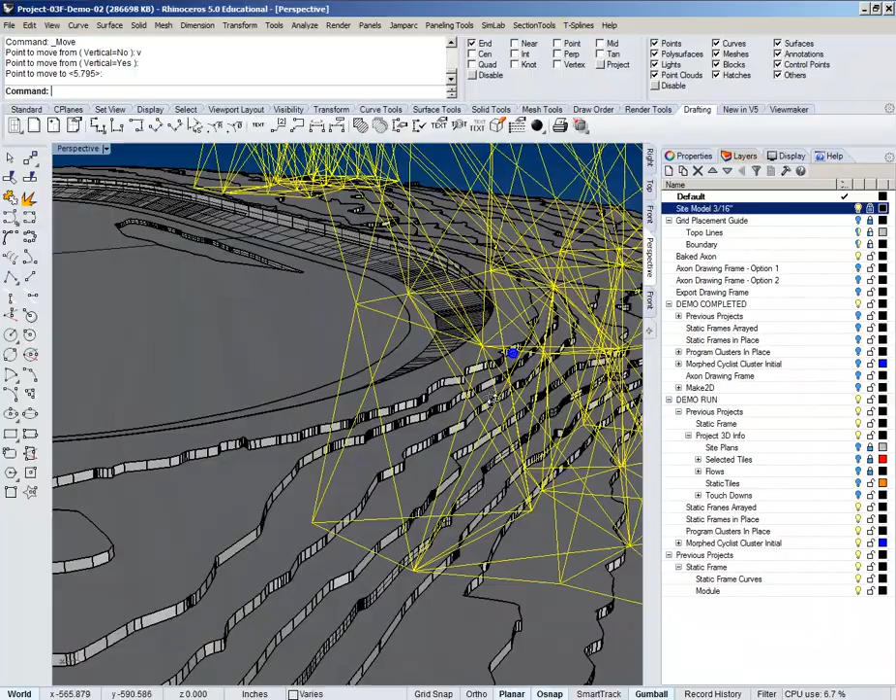So it's kind of easy to do that and get that on there. Once it's on there, you're kind of in the neighborhood for everything else. Everything's going to kind of need adjustments. The way you would kind of adjust it is really simple.

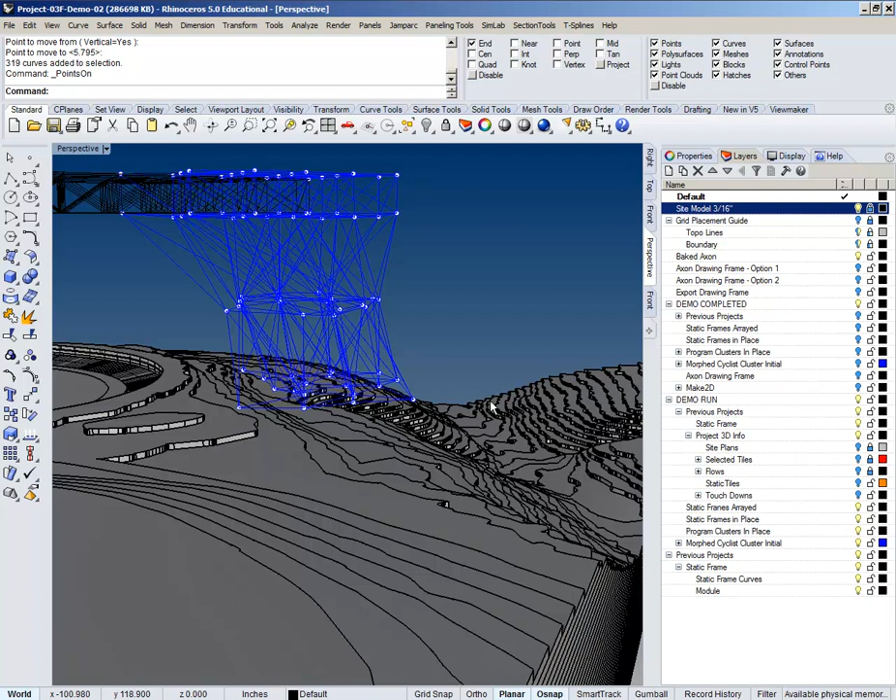You want everything grouped, and then once everything's grouped, you can turn on its control points. So you can hit F10 or you hit the button here to turn the control points on. And it's going to keep all the control points in one spot for you. So all you really have to do is worry about drawing a big enough box around the control points and getting it on there. So I've got this one down already, but let's say I want to bring this one down.

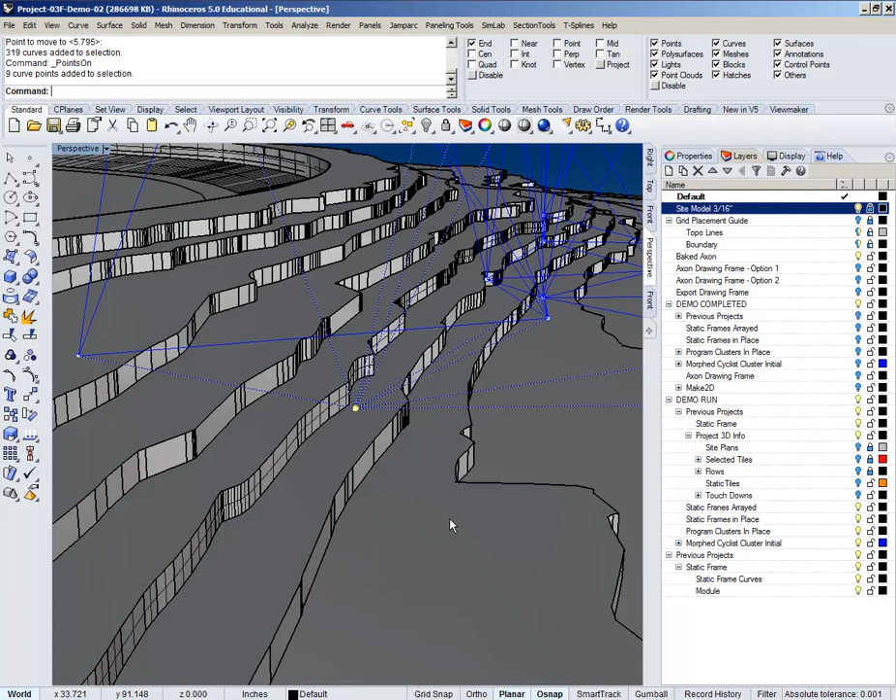If you've ever worked on this kind of stuff, you know, like if I start right now I've got this site model locked, so I can't grab it. It allows my box to draw fine. That's one way to take care of yourself. The other way is if you've got other stuff you're worried about grabbing, I don't know what you'd have, but let's just say in the future you do.

If you hold down Alt, so I'll unlock it, instead of dragging the objects behind it, Alt forces a selection window, so it doesn't let you click select. It lets you just grab it anyway.

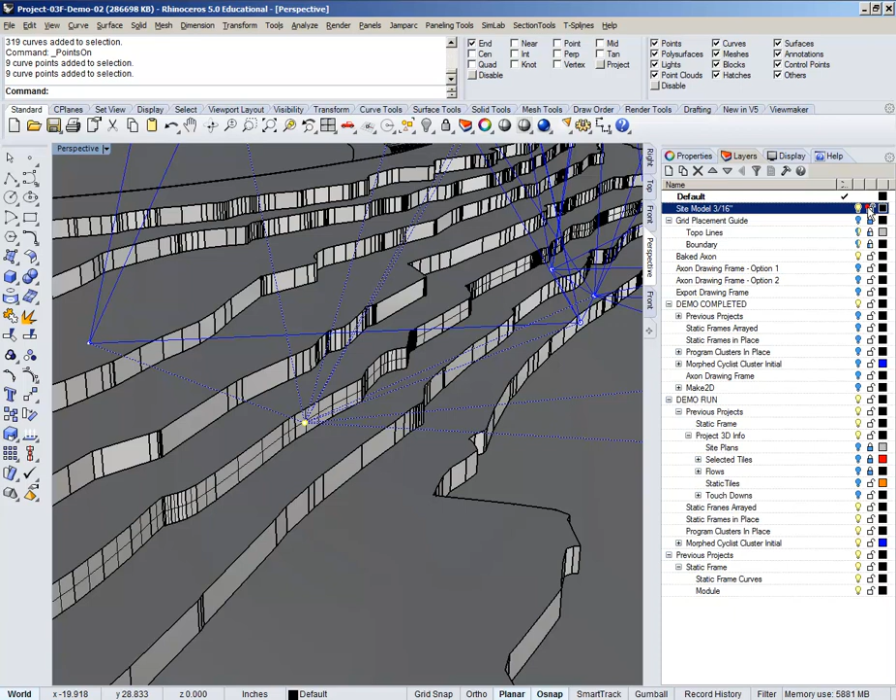So it's ignoring anything that it touches, and it's just forcing the selection box. Anyway, I can grab this, turn on my gumball, and bring it down to the point, snapping to the end of whatever one I want.

So for this one, I make a decision on how I want to situate this. Do I want to take it all the way down and start to pull the frame into the ground? I can also rotate my camera up a little bit, and with this gumball I can do a planar move over and sit it at this level as well.

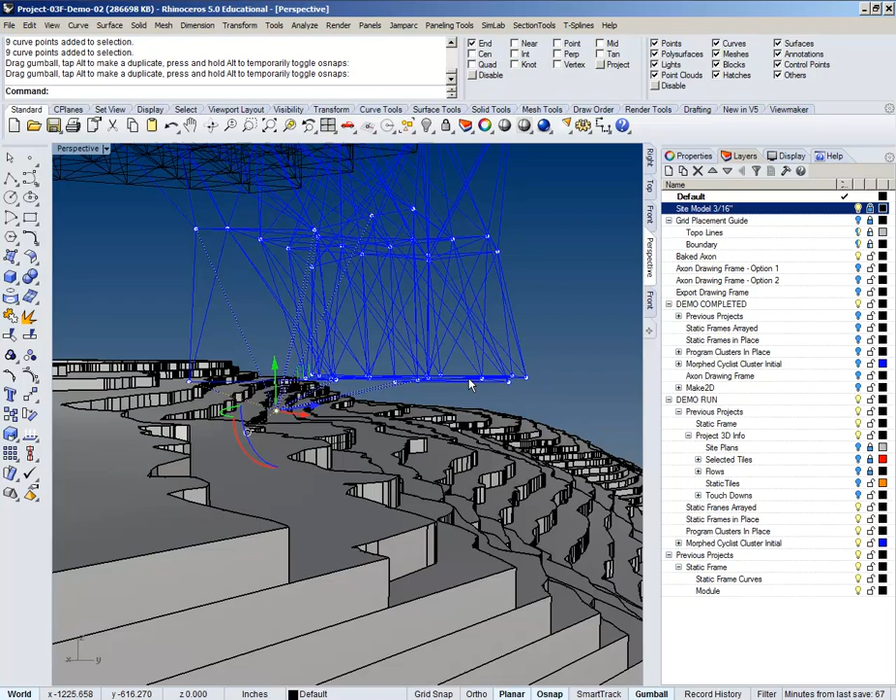What you'll start to see is you've got this condition where you ask: do I want to keep it planar in some areas and project out? Do I want to bring everything down or not? But the general workflow is just that.

And if you're not sure about whether you used this one or that one, you can start to use tags and everything else. If you get a weird gumball like that, it might just be the settings.

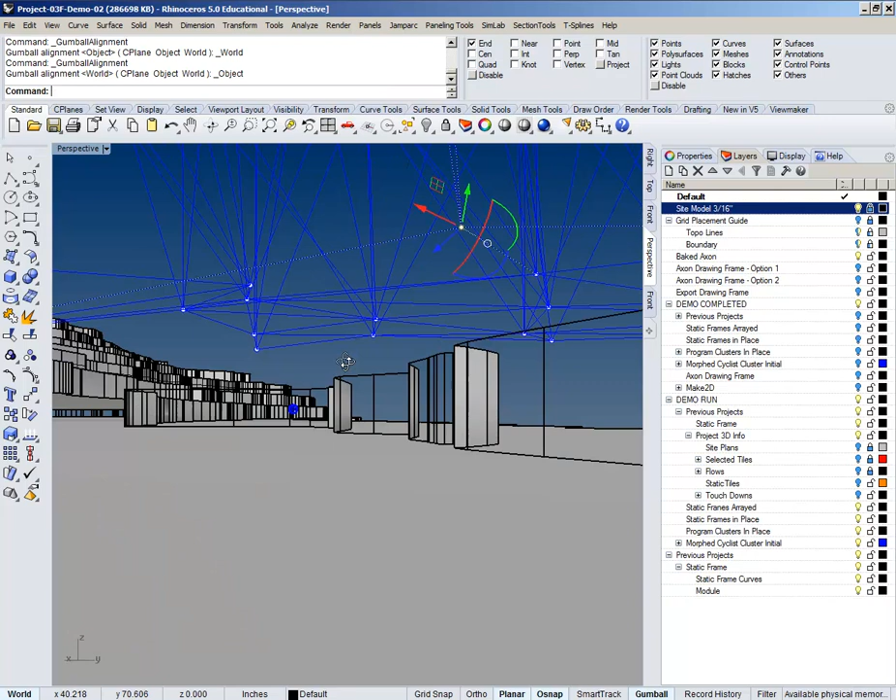So you want to make sure of two things: that it says snappy dragging, and that it's aligned to the world. If it's aligned to the object, you might get some weird directionality going on. So just click that little tail there and say align to the world, bring it down to there.

You're going to kind of repeat and rinse, and that's the workflow for all of them. Some of them are going to be closer than others.

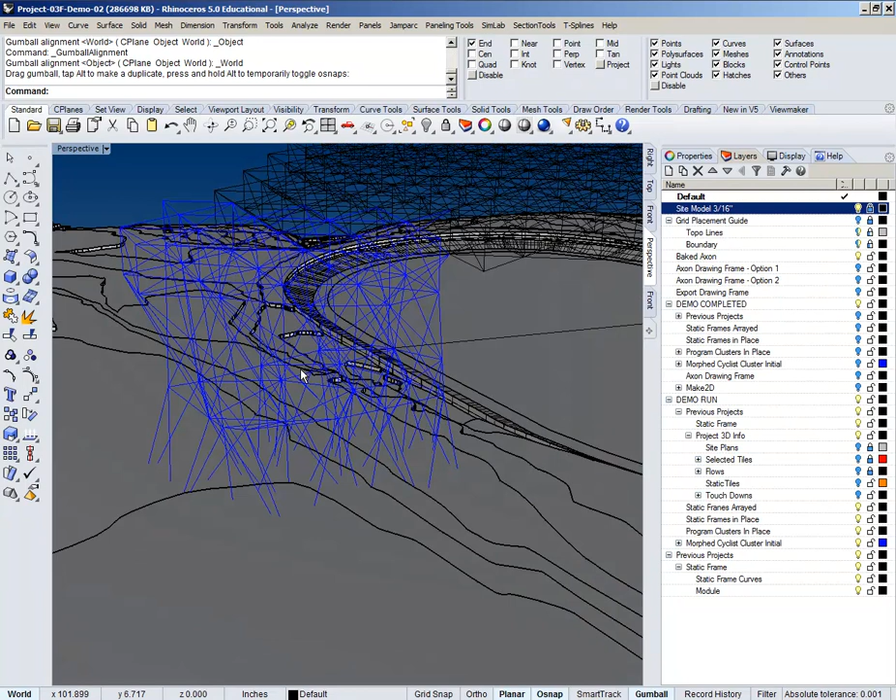Like if you're in this kind of condition and you lost them, there's a couple different ways you can go about it. If you lose the selection, you can still kind of do one of those and grab the points. But you can also turn on wireframe, and you'll be able to see the points again, at least enough to grab them.

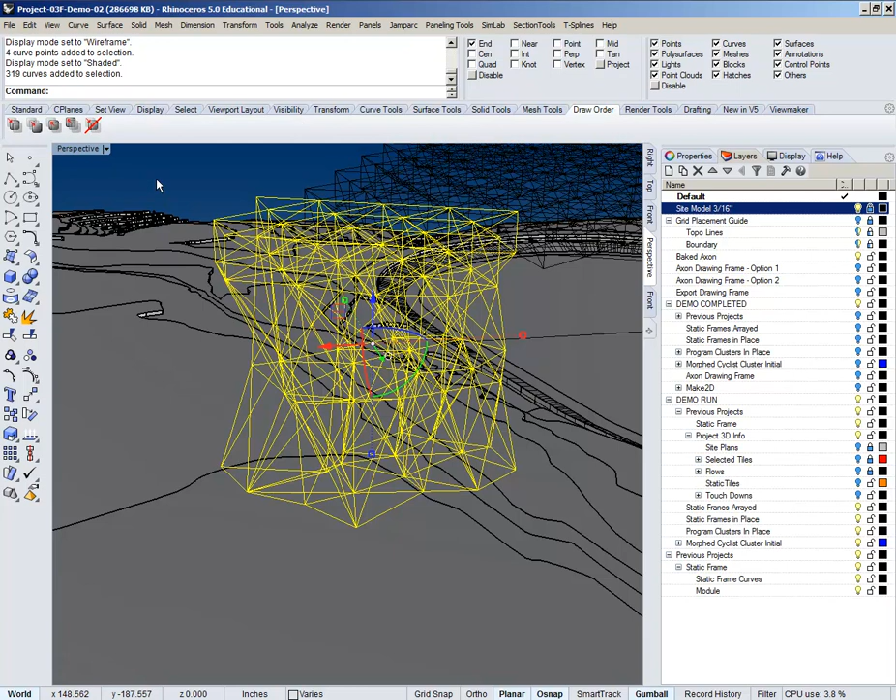The other thing you can do is take these guys, if you're in that condition, and change their draw order. It might make it a little confusing, but it might actually work for you too. So I'll try it - I haven't done this, but I'll give it a shot. If I bring it to the front, then even though that thing's underneath it, I can still see it.

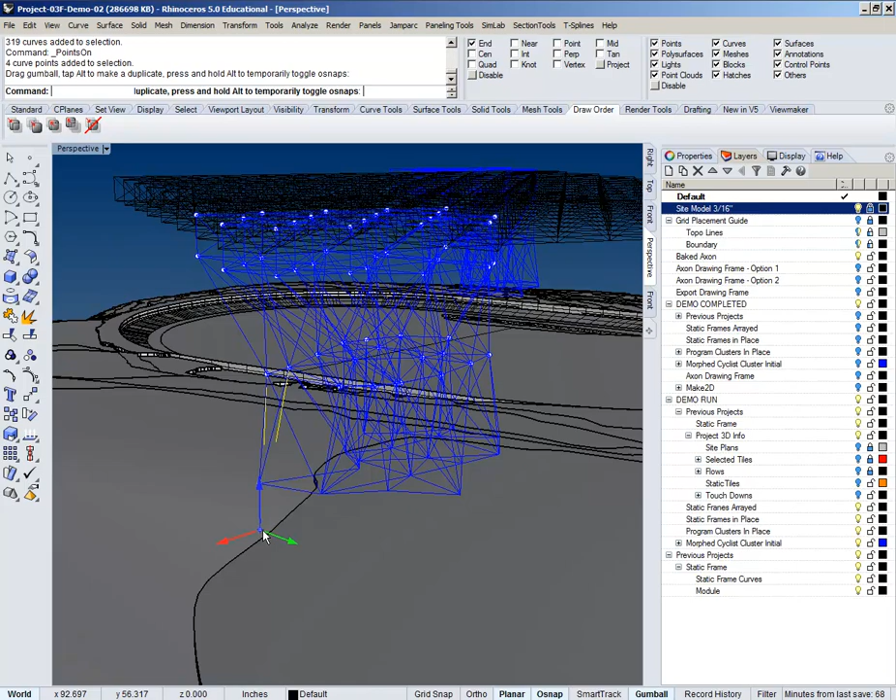That's not that bad. For some reason, I can't see its control points. That's not that cool, but they're there. So I'm just kind of marking where this is.

In this case, gumball is my friend because I know I can't do any moves that I don't want to do. So this kind of method can also help you if you need to make any kind of adjustments, if you've got any torque that happened and you need to realign your space frames.

You can start moving these as well, do any kind of adjustments here. I also think it's good if you want to make any adjustments in your attachment. If this is lower and you want to start to adjust these systems, you can start making changes on it as well.

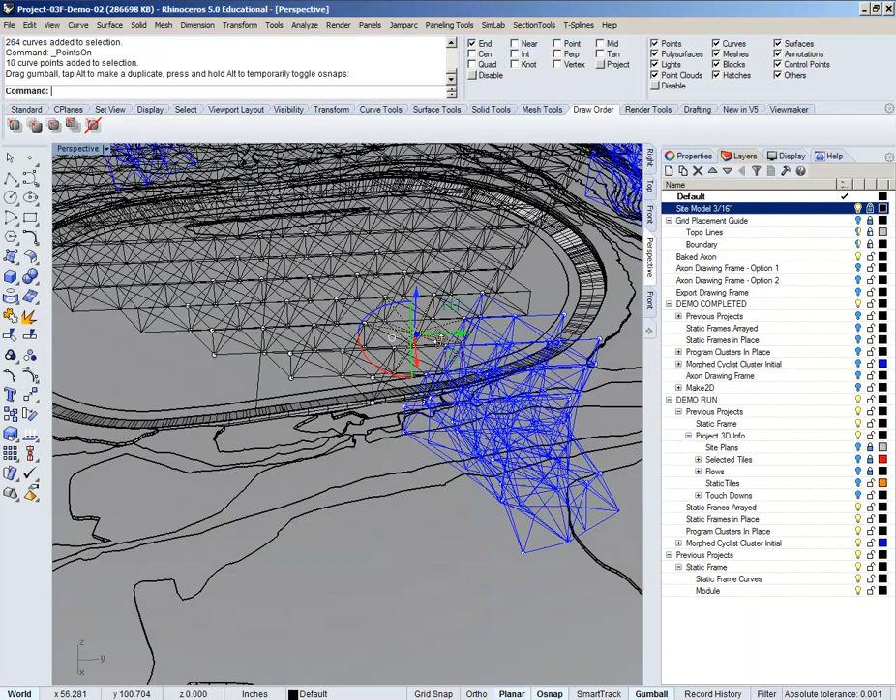And you can do whole scale changes and stuff like that too. But I would really make it contextual, based on what's going on.

Remember, you can temporarily deactivate your snaps by holding down Alt, and that'll keep your snaps from coming.

So let's say you've done that, you've made your adjustments on the site, you've got everything pretty close - at least enough that you can do a test print for the pin-up and get some feedback. And then I want to project the axonometric.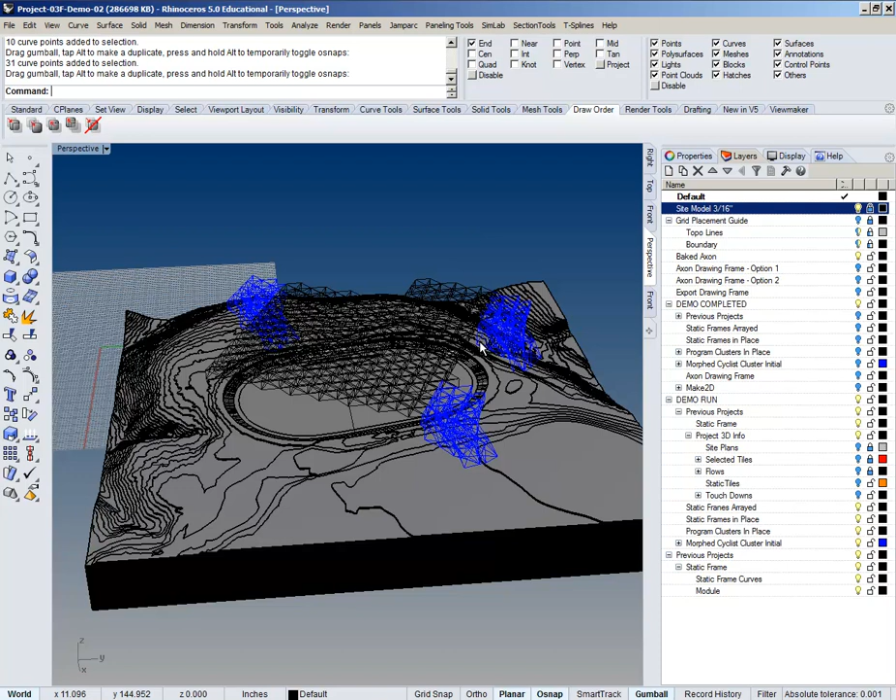As you can tell, this is a lot of geometry, right? You've got not only the space frame, which has a half a dozen thousand members, but also this topography, which, because I wanted to give you lots of geometry to snap to, has a lot of geometry built into it. It's a layered series of extrusions - there's like 60 odd extrusions in there.

That's why, if you look at the template, there are two versions: one that's more zoomed in, and one more zoomed out. The topo is already in the Illustrator template because, due to the nature of the projection, the land can't occlude the space frame.

It can't block it because we're looking at this top-down view, and our topography generally goes like this, so we're not worried about the land blocking it from our view. We can literally just project the frame and drop it onto the topo that's already in the Illustrator file, instead of trying to do the axonometric for the topo at the same time and then do the Make 2D and drop it in there. This will save a lot of spinning blue wheel, depending on your version of Windows.

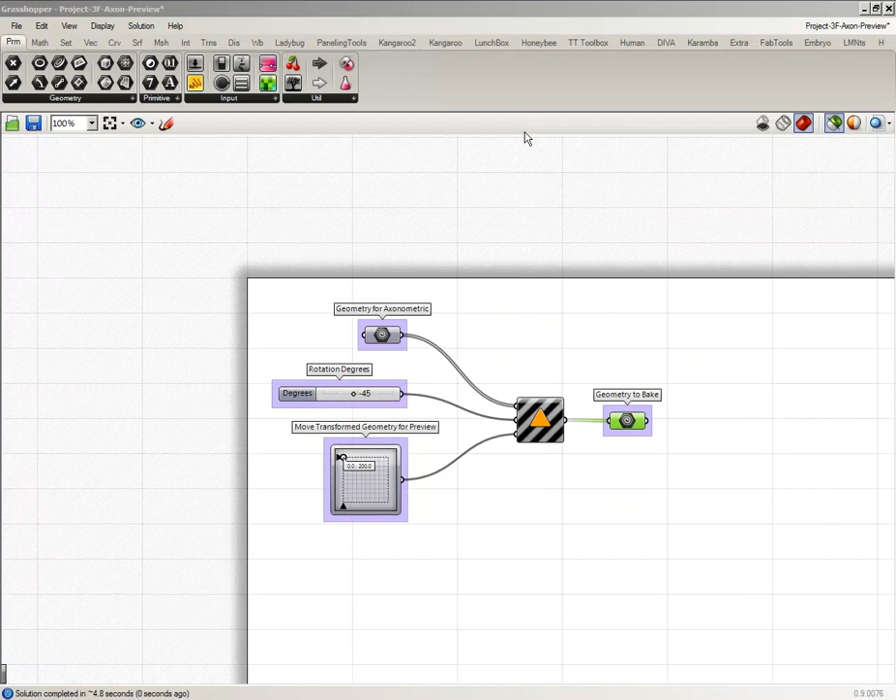So we're going to go back and use our friend, the axonometric definition. I'll include a new one of it, but the only difference is that I set the degree to match the template drawing we're going to use, which is 45 to the left, and the placement of it. The placement is specific because it drops it into one of two frames that you can use.

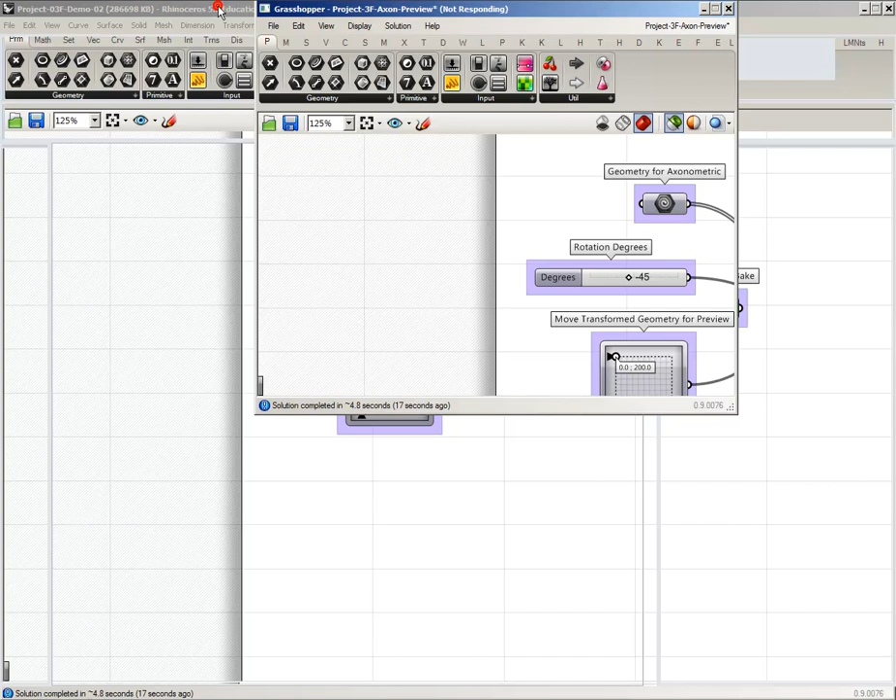So in the model, there's a frame that references both of these options. There's a frame that references this option and a frame that references that option. And there's a third frame that you scale everything to. It was thinking a bit because I have everything assigned to it.

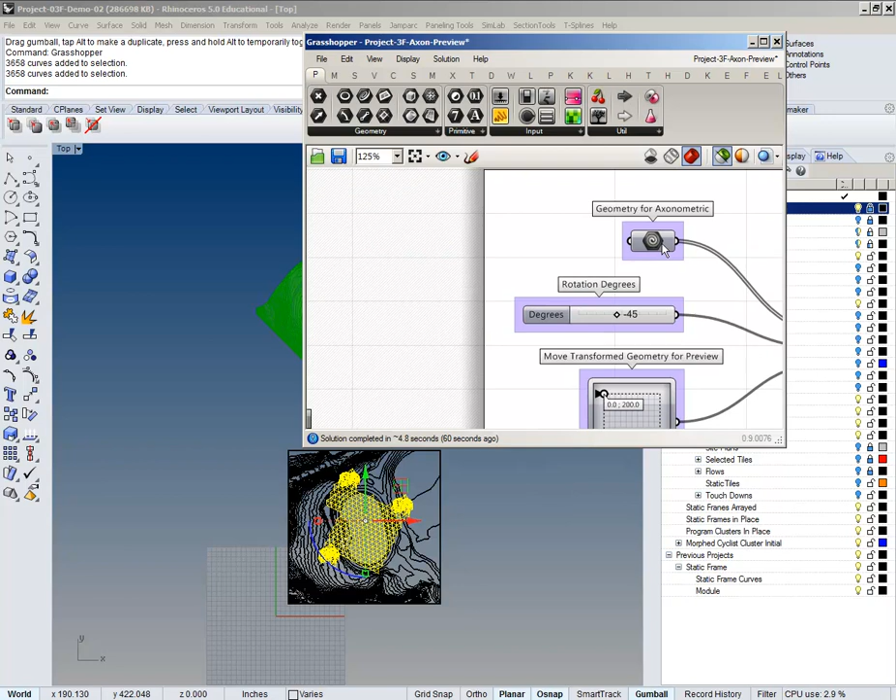So this is what we're now doing. I'm going to go to my top view, and what I'm really projecting—I'm going to lock my site model, and I'm selecting the stuff we were just working on, all my space frame stuff. I'm going to go to the top, and reassign that geometry to there. That's a lot less thinking—that thing automatically pops up and comes in.

I'm going to turn on the layer here. You'll have far fewer layers because I've got demo stuff in here, but there are layers called Axon Drawing Frame Option 1 and 2. The less zoomed out version is Option 1, and the other is Option 2. That's where you would do the Make 2D and bring it in there.

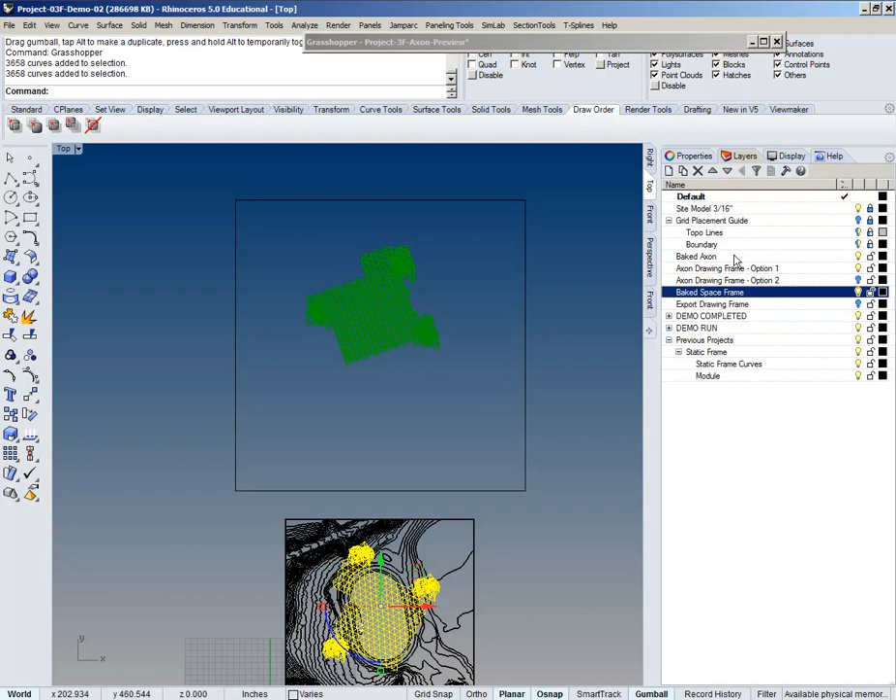Let's say I want to do Option 1. I turn off Option 2. I'll do a new layer for my baked space frame, and I'm going to bake the space frame to that layer. Oh, I already have one called Baked Axon—whoops. Fair enough, so let me turn my Grasshopper off.

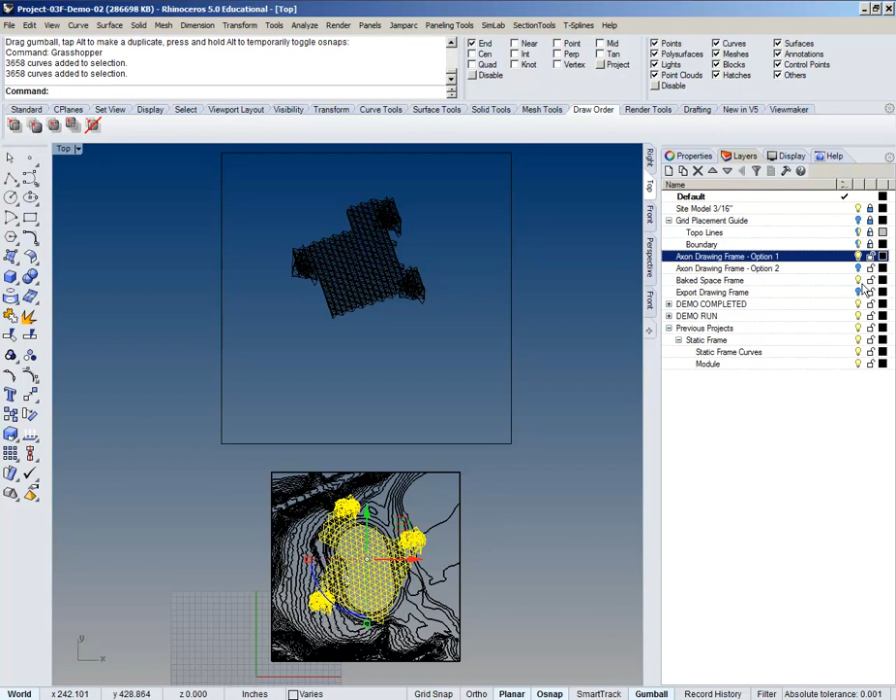That looks good, this is ready to get exported. Full size—oops, not ready to get exported. I jumped the gun, I need to scale this guy.

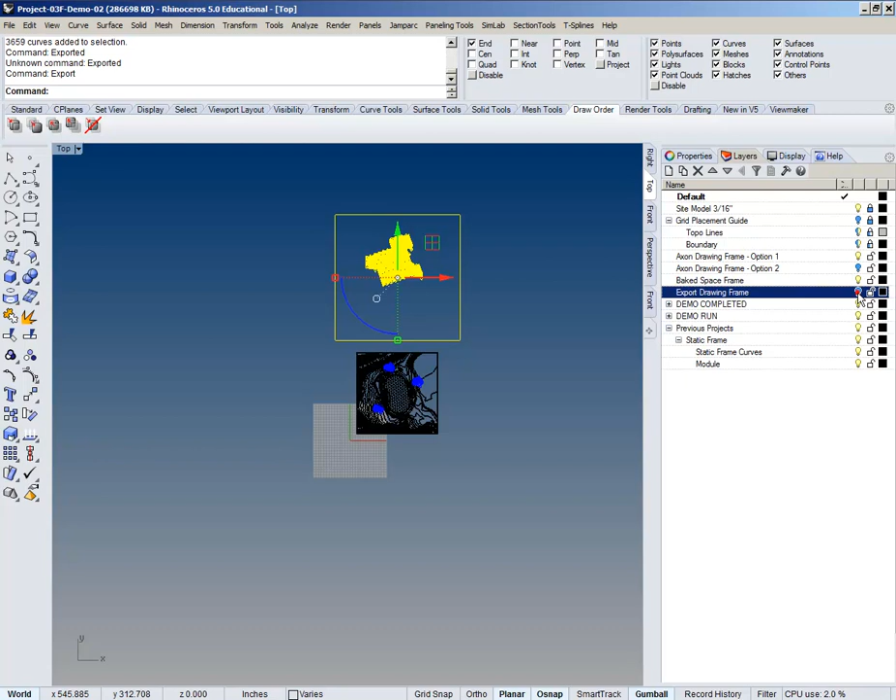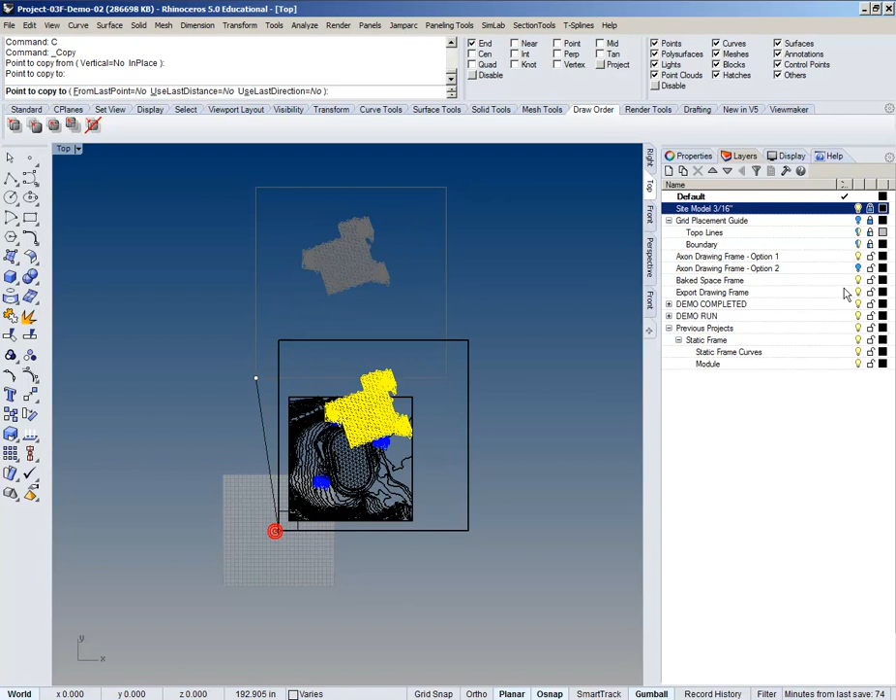So there's a frame called Export Drawing Frame, which is a 2x2 square, that's all it really is. I'm going to move my drawing over to that. I'm better off copying it just to be safe, and scaling that to that, and exporting that.

Full scale. And I picked Option 1, right? Okay, so the only thing with this is, to get ready for it, this is already done in terms of the color and the line weights and all that. We just want to make sure it's on the right layer.

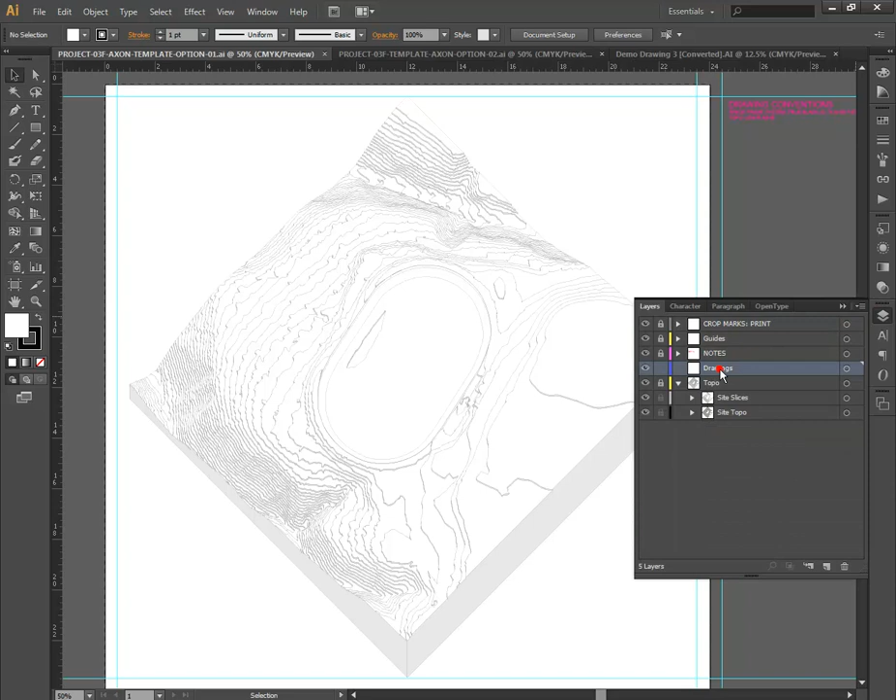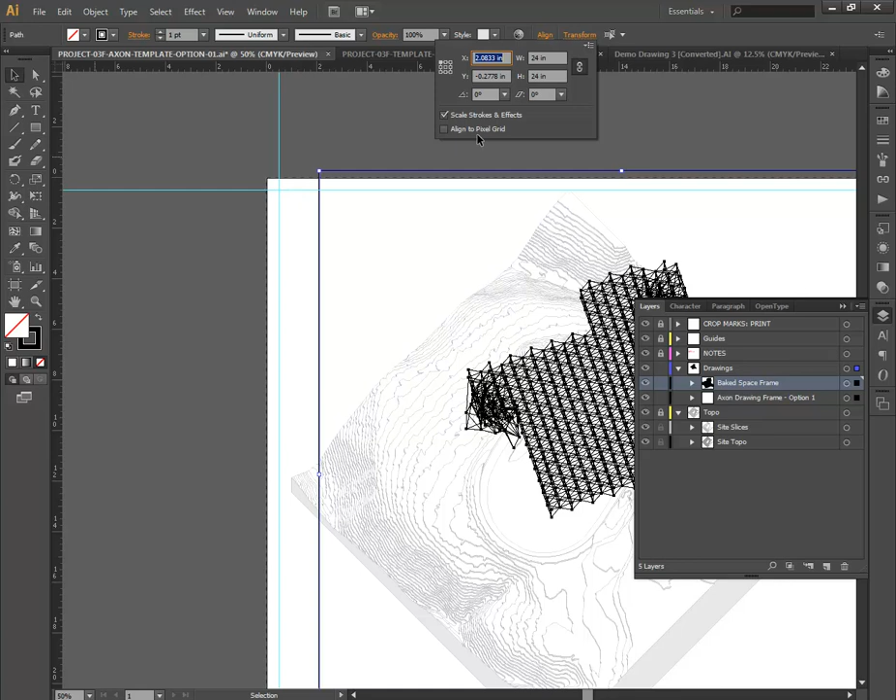There's a spot for drawings. When I do this stuff, I'm going to drop it in that spot for drawings and use that frame to move it over. I mean, I can always move it like this. I can also take my transform and register it to the top left because this border is half an inch. Well, that doesn't matter because this is a 24x24, so I can just say 0 and 0 for the X and Y, and that way I can just use the math on that one.

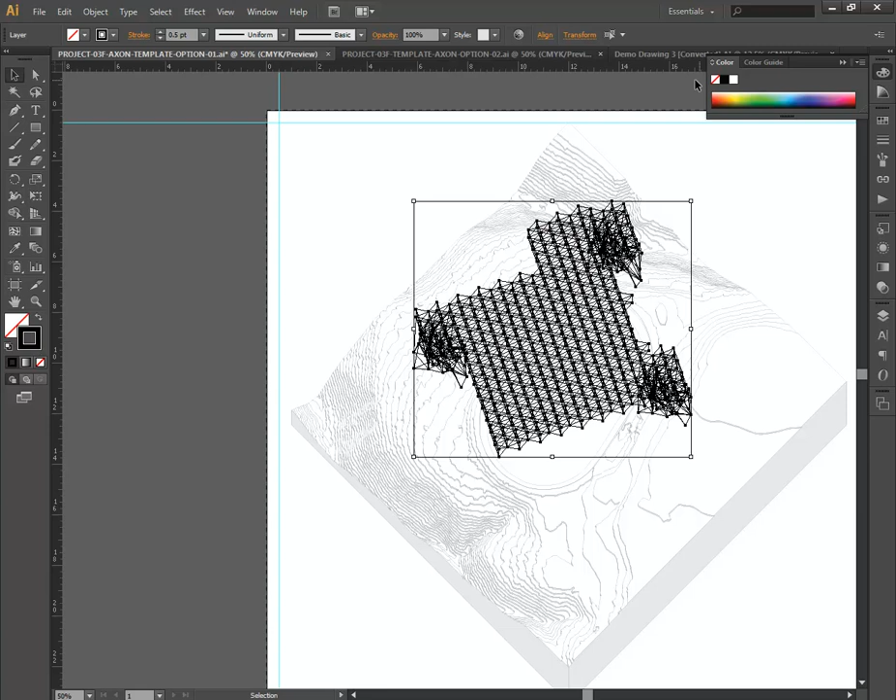And take this drawing—I'm going to look at my space frame that's baked, and I'm going to change it to be 0.5, use true black, and get rid of the fill. It shows up a little light, but we did some test prints, and it'll print darker, as you guys have kind of done.

Same workflow for Option 2. I just would have picked the Option 2 frame, used the Option 2 template. That thing is ready to go and already lined up too. Workflow's exactly the same for that.

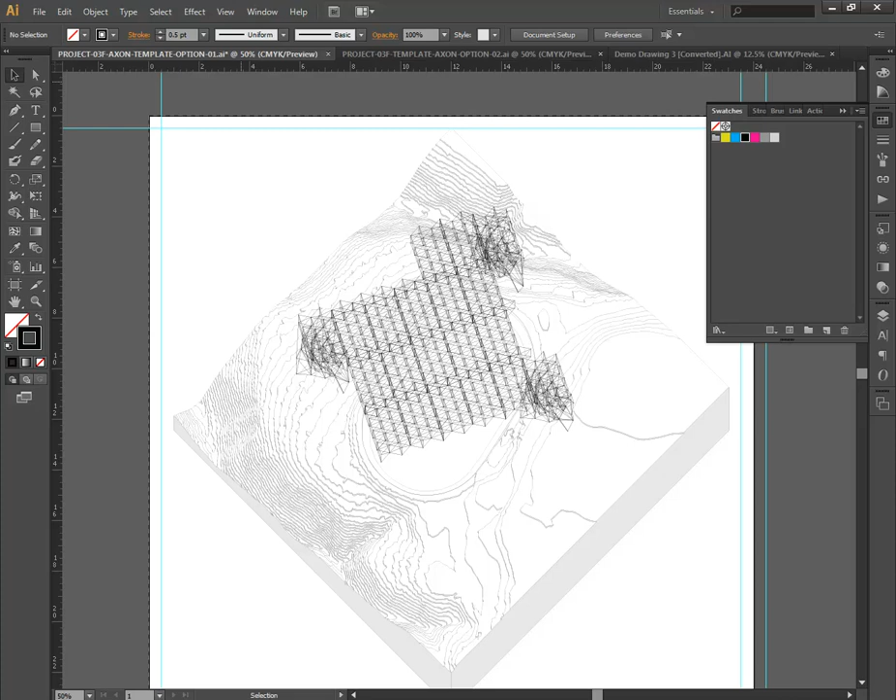So going into it, the provided stuff is the Rhino template, the two Illustrator templates, and the Grasshopper. You can also use those values if you don't want to use that preset one—you just have to use the same values to drop it into the right place.